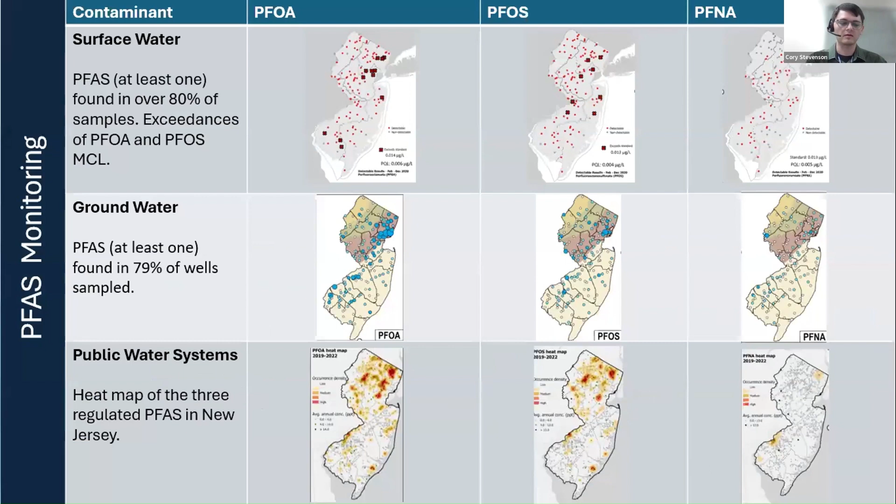In the last row is the heat map of PFAS prevalence in New Jersey water systems. As you can see, most of the contamination is in the northern part of the state and along the Delaware River.

For treatment approvals, there are two processes in New Jersey that water systems can utilize. There's a normal permanent process, which is intended for water systems to submit and install permanent treatment. And we also have the temporary treatment approval process.

The temporary treatment approval process is intended for water systems to use for pilot studies and interim treatment. PFAS treatment upgrades require a lot of space, which could impact the system's ability to install PFAS treatment within the state's 1-year compliance timeframe, as there might be issues with land use, backwash, waste discharge, or supply chain delays. Some water systems have proposed trailer units or other similar treatment to remove immediate exposure for their customers, while a more permanent option is designed and installed.

For the water systems that put interim treatment into place while a more permanent measure is designed, if the system already incurred an MCL violation, they must still continue to issue public notices.

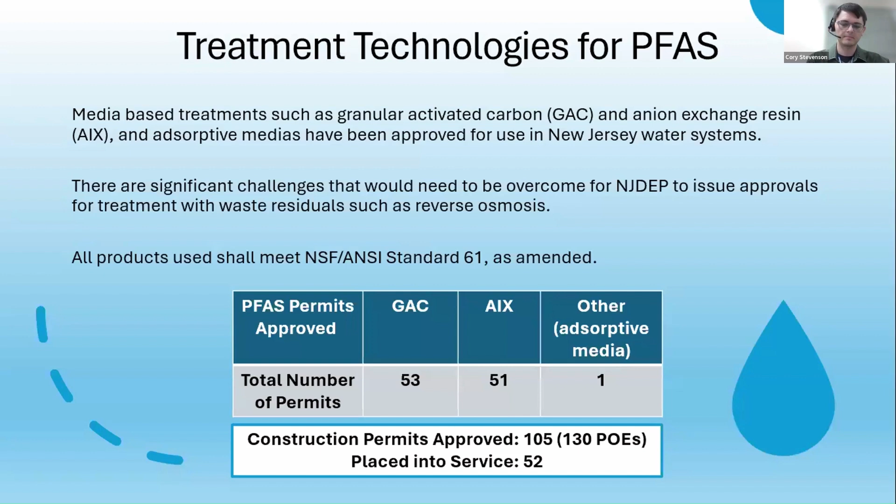Now, there are certain review criteria that our reviewers take a look at when considering a treatment technology and product. Just because anion exchange has been approved previously does not mean that all anion exchange medias work the same. And each individual product and trade name can work very different, and thus it needs to be reviewed.

The first thing our reviewers consider when looking at media is, has it been approved in New Jersey before? If it has been approved before and it has been effective, then it's usually a straightforward approval with information only being requested as needed. The standard condition for approval includes point of entry monitoring that is independent of compliance monitoring.

If a product being proposed has not been approved before in New Jersey, but it uses the same technology as one that has been approved, then we will likely need some more information. Typically, the reviewer will ask for case studies, such as approval in another state or use in a prior pilot study. In most scenarios, there is enough evidence there to justify an approval.

In the unlikely scenario there is not, then a pilot study may be required. The standard monitoring conditions are usually extended in these type of approvals.

For a new treatment technology that has not been approved before or has little track record, the treatment shall be pilot tested. These treatment technologies are when a state's temporary treatment approval program should be used. The conditions would typically require extensive monitoring and likely require the submittal of a sample plan.

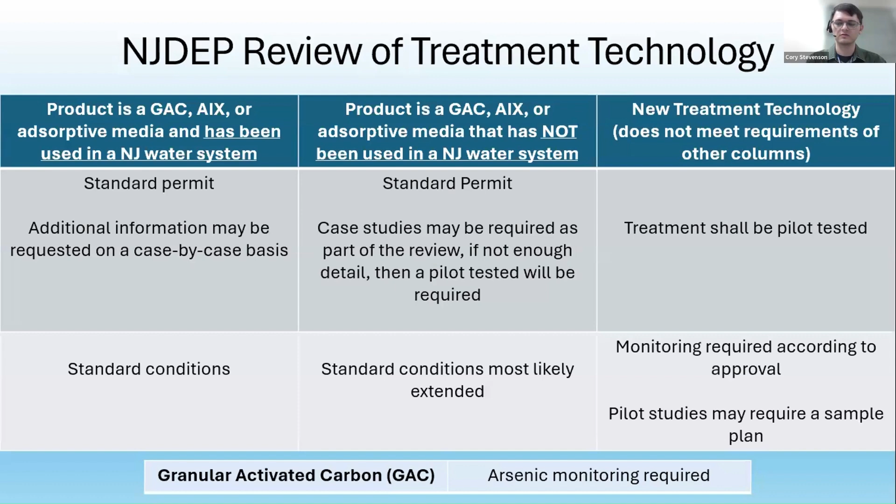If you go below the minimum, you may see short-circuiting in your media, otherwise known as preferential pathing. If you go too high above the maximum, it can lead to issues with pressure. The media layer thickness is as required by the state's regulations.

For the novel adsorptive medias, the design can vary, and it is recommended to use manufacturer recommended design criteria, but also to pilot study to confirm these parameters. As previously mentioned, all media must meet the applicable certifications for use. In addition, there's a chance of bacterial growth in these media beds, which may lead to disinfection being required.

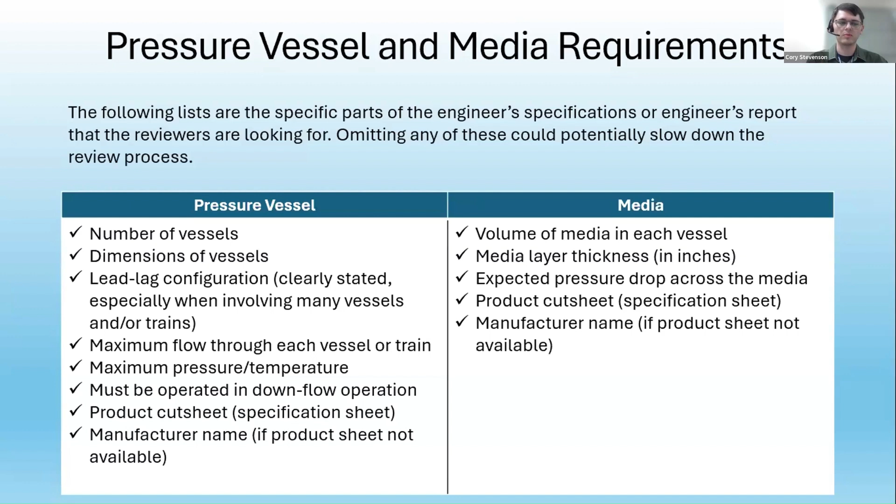Those are the big requirements for the vessels and media, but there are also requirements for the small features that can sometimes be omitted. At a minimum, a sample port shall be provided between each vessel to monitor for breakthrough. While this is the minimum requirement, for the large 20-foot high vessels, it is highly recommended that there are sample ports at various media depths to track breakthrough.

Pressure differential monitoring is also highly preferred for the vessels. When pressure losses start to increase, it indicates that the media is either being fouled, or at least in the case of GAC, can indicate when an operational backwash may be needed.

Anion exchange cannot be backwashed, so an increased pressure loss across the media can indicate that pretreatment is insufficient. If pressure differential monitoring is not provided, then at a minimum, pressure gauges shall be provided. Pretreatment such as cartridges and bag filters are common when using anion exchange.

Just because it's a minor feature does not mean its details should be omitted. All specifications shall be provided so that we can document the filter sizes and filter type. It's also highly recommended that there be some form of pressure monitoring for these filters as well.

The application should fully answer some other questions, such as how much wastewater is generated and how is it handled. This includes initial rinse and operational backwash water. If it is over a certain volume, then special permitting will also apply.

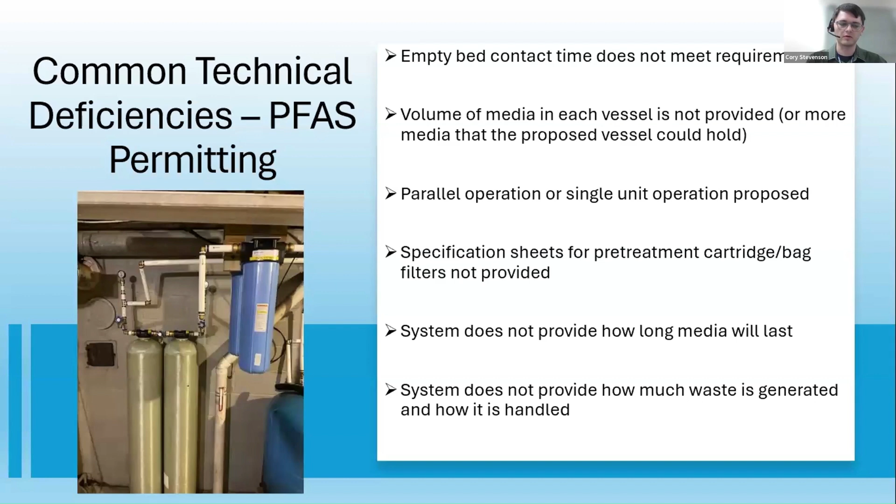Now, those are the deficiencies specific to PFAS treatment permits. Here are a few additional deficiencies I wanted to point out.

PFAS treatment is very large, and fitting the vessels and equipment inside can require full new treatment buildings. Some water systems have been using the vessels outside, and if you're doing that, it requires extensive heat tracing. And we've seen that even with heat tracing, fixtures can still freeze and leak.

In a lot of designs that we've been seeing now, water systems are using a heated valve house between the vessels, and that has had more success. So if any equipment is outside, the heat tracing efforts and all efforts to protect from freezing need to be documented. The treatment order on drawings can also sometimes just be outright confusing.

In many situations, if the system submits a flow diagram in support of the drawings, it would help eliminate a lot of the back and forth between the authority and water systems.

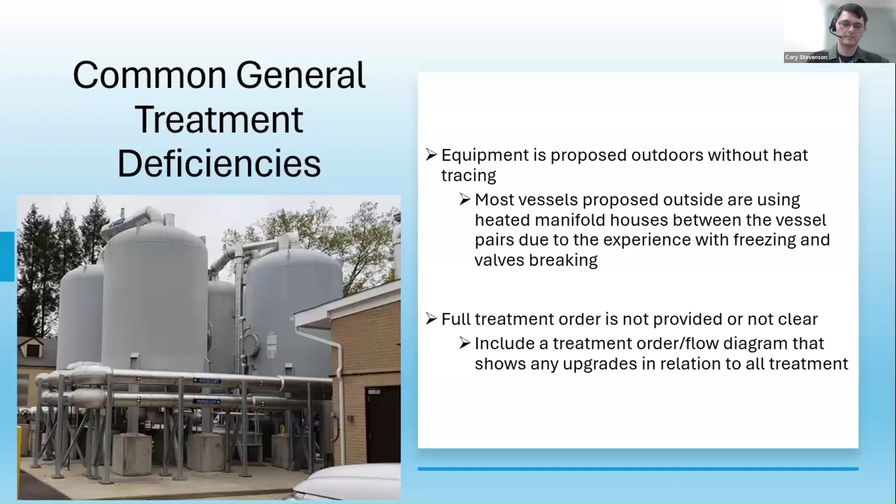Looking at pilot studies now, there are two routes that a system can go for pilot and treatment, and it depends on what they do with the treated water. If the treated water is put back into the water system for potable use, then the pilot study must go through the state's temporary treatment approval process.

This way we can certify that all chemicals or products that are used are safe and are not introducing risk to consumers. If the pilot studies are discharging water to a sewer or being collected for off-site disposal, then no permit is required.

In these scenarios, though, we highly suggest that water systems meet with the permitting team so that we can provide feedback on any parts of the study.

In New Jersey, groundwater systems are not required to pilot study treatment unless it is a new media or technology. As the state is small, water quality does not differ significantly, but there's also been a lot of success in treating groundwater in all areas of the state.

However, if there's a lot of iron, manganese, or competing contaminants in the water, then it might be in the system's best interest to pilot study the best treatment.

We also highly recommend that surface water systems submit pilot studies, as there is very limited data out there for PFAS treatment on surface water, and water quality is variable, and it's also going to be expensive.

While every pilot study proposed goes through an individual review, and the reviewers may request specific information, we do have some general guidelines for what we want to know.

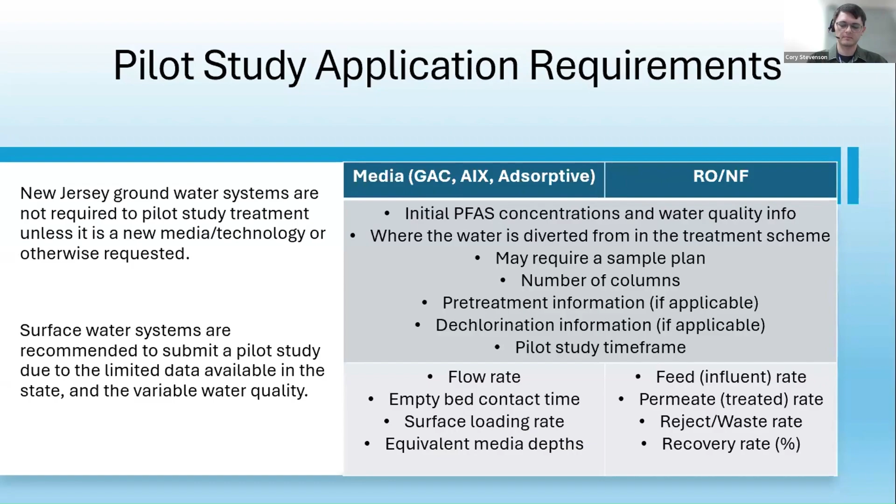When a pilot study is complete, the expectation is that the water system shall submit a full written summary of the results with the analytical data and figures to support the findings. At a minimum, the results should show treatment removal efficiencies and the expected media or membrane life with the figures to support it.

We've also had some water systems have to change out filter micron sizes to prevent media fouling during testing. So any such water quality issues during testing should also be documented. It's also highly recommended that the water systems meet with the reviewing team to discuss the results.

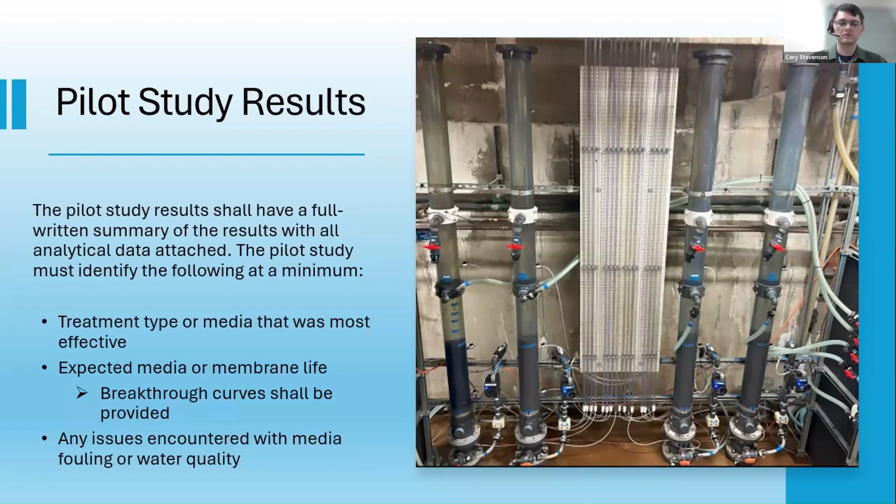Here's an example of how New Jersey handled a pilot study proposal. A water system reached out to discuss the idea of using a novel treatment technology that uses electrostatic treatment in conjunction with reverse osmosis.

They do not have a nearby sewer, and handling waste in general would be problematic as they're a very small water system. A full-scale pilot study was proposed where the reverse osmosis concentrates the PFAS and the electrostatic treatment removes the PFAS from the water.

A bench-scale study was provided to the department in addition to other case studies of its use. The department then set up a meeting with the water system, their engineers, and a manufacturer to discuss the treatment and also the design requirements that we would look for as part of the review.

The application was submitted, reviewed, approved with a monitoring condition similar to that which is shown on the right here.

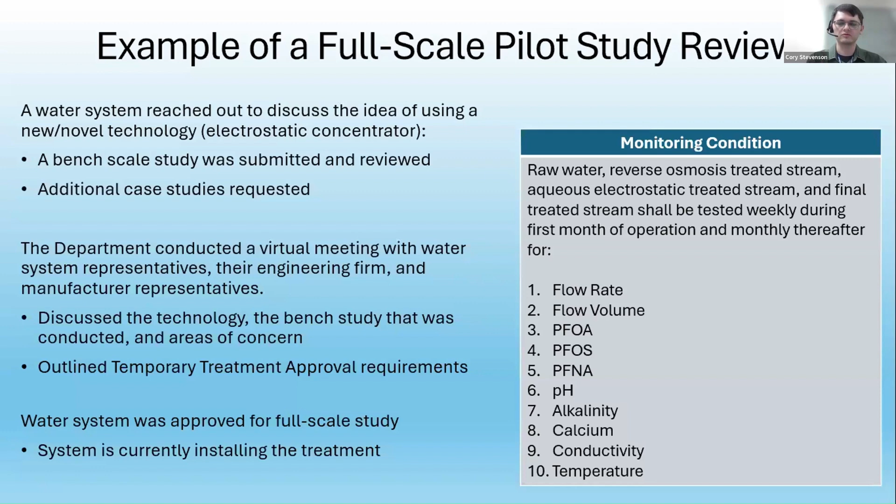Most of what we discussed today is more so related to groundwater design, as surface water design can be quite problematic. Groundwater applications require lead lag design and almost always use pressure vessels. This likely would not be feasible for surface water systems, especially our larger surface water systems that treat up to 200 million gallons per day at a single treatment plant. This may mean that an alternate approach to design might be needed.

To adequately address and understand all challenges, the PFAS rulemaking team recently held a focus group with all New Jersey surface water systems and their engineers. The NJDEP is currently considering all feedback as we move through PFAS rulemaking.

As New Jersey has prior rulemaking experience with PFAS, we've also had time to reflect on some areas that could have been improved upon. PFAS is not a drinking water initiative alone, as the installation of PFAS treatment can impact land use by requiring wetlands permits, can impact wastewater group by requiring a discharge permit for backwash water, and many other permits. A committee was formed to evaluate the full impact across the entire NJDEP.

The goal of the group is to identify all permitting processes and outreach areas that can be improved. The committee includes upper management and staff from multiple divisions at the NJDEP and representatives from both water systems and engineering firms.

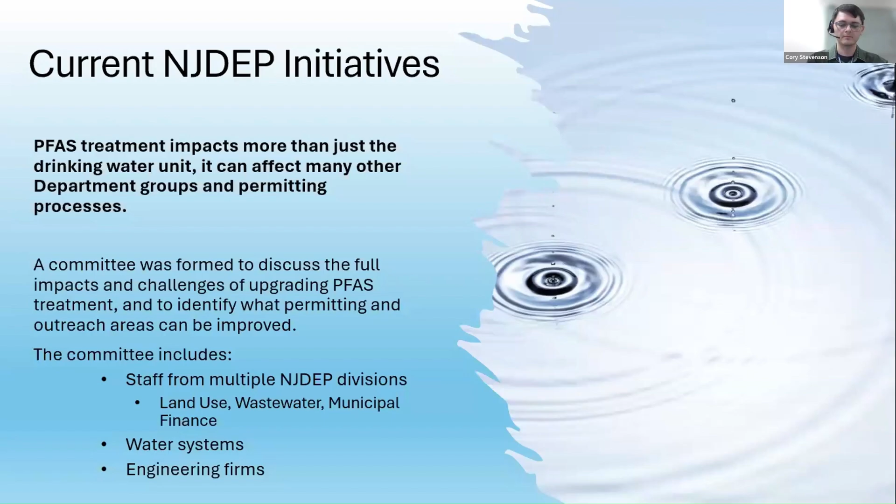So that was a quick glimpse of how New Jersey handles treatment reviews, some things that our reviewers look out for, and the state's current initiatives.

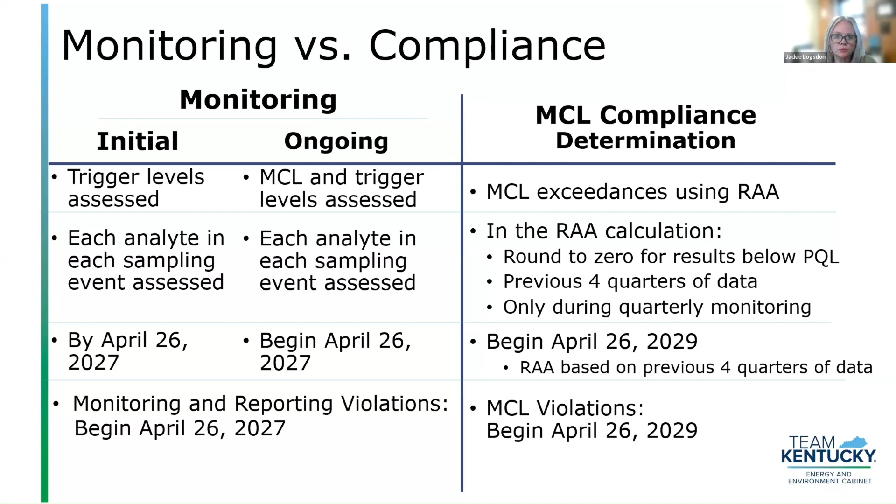The purpose of this slide here is just to show you that for the remainder of this presentation, I'll be focusing on initial monitoring. That's our effort right now in Kentucky, which I'm sure it is with a lot of the other states too. We've kind of got this broken down into 3 different compliance milestones, so I'm just going to focus on that initial monitoring.

With the initial monitoring requirements, different data that can be used to meet them includes the UCMR 5 data. In Kentucky, we have 130 community water systems participating that will have that UCMR 5 data. We also have Division of Water monitoring data available for all of the water systems in Kentucky, with the exception of a few private, non-transient, non-community water systems.

And then we also have water systems that have been doing their own sampling. For any system that wants to use their own samples, we're verifying that they meet those monitoring requirements.

So what we're taking a look at in Kentucky, and something that we're encouraging operators and water systems to take a look at, is what does initial monitoring look like for your system? And how does the UCMR 5 data fit in? And also in Kentucky, how does our monitoring data fit in?

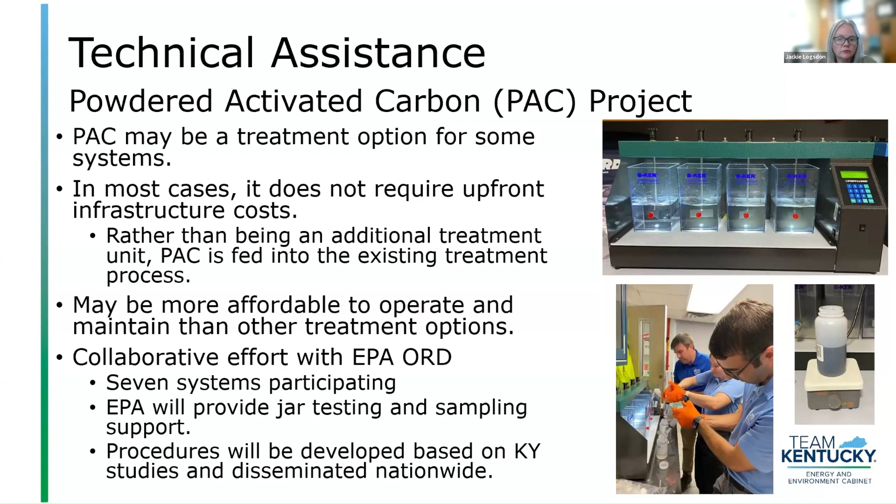We have already conducted our first site visits, and bulk water and samples have been collected at these systems.

We also have a stakeholder group - it's a PFAS subcommittee of our water utility committee. We have 3 subgroups: a funding, a bench and pilot study, and a communications subgroup. This is a really good opportunity for us to be talking to the water systems to find out what they need from us and how we can help water systems comply with the rule and provide support and resources.

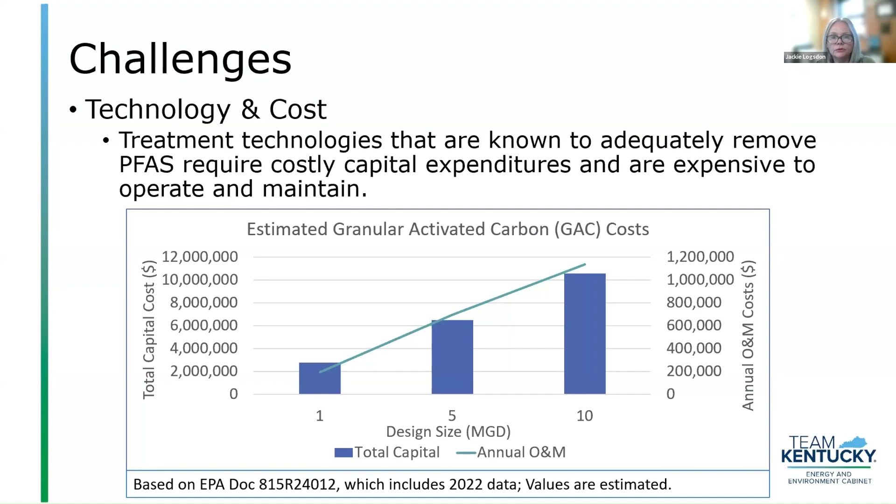When you're looking at the estimated cost for GAC for a 1 MGD plant installation, it's just above that $2 million mark, with O&M around $200,000 a year. With a 5 MGD plant, you're looking at above $6 million for infrastructure, and then around $700,000 a year for O&M. And for a 10 MGD plant, you're looking at just over $10 million in infrastructure and greater than $1 million per year on O&M.

Other challenges we're looking at: water systems have 5 years to select a treatment method and engineer a project, obtain funding, obtain approvals, acquire equipment that may have long lead times, install or construct the project, and also collect 4 quarters of compliance data to be used for compliance determination in 2029. So actually, the first few bullets need to be completed by 2028 in order to be collecting PFAS data that's in compliance for that running annual average in 2029.

There are going to be some disposal issues, looking at land farming impacts, liability, landfill disposal challenges, and personnel. If water systems are installing new treatment technology, there's going to be training needs in Kentucky, and I'm sure nationwide. We're looking at an operator shortage.

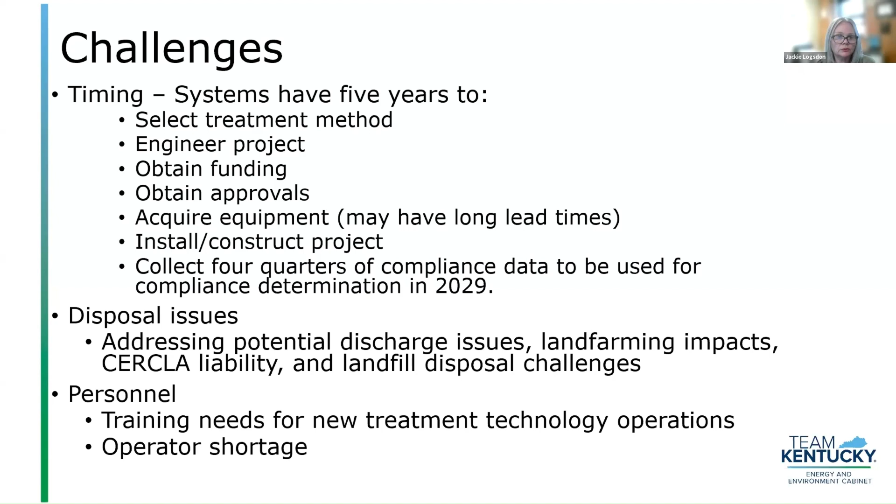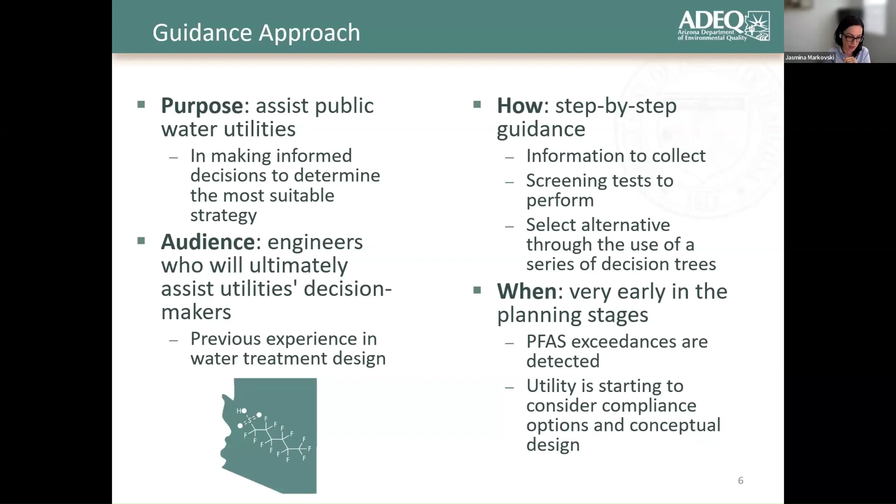So to do something like this, you need a team. Now that this document is published, I can confirm, yes, it takes a village. But that's actually the key point and value of this type of document. It is not made in a vacuum, meaning stakeholders were involved from the very, very beginning.

We had multiple people from state government, ADEQ specifically. Then we had help from federal government, specifically EPA or their office. Then we had non-profit organizations, leading media manufacturers—you can imagine these are very competitive people, so how do you cover it all without creating conflict. And eventually we had consulting firms, because those are the stakeholders that are eventually going to submit those applications to us. So it's very important to be transparent and be on the same page, with agreement between everybody.

So let's talk about what information you need to run this tool. To do any kind of design, you need information and data, and there's nothing new about that. But if you want to summarize it, I would say you need to collect knowns and screen unknowns.

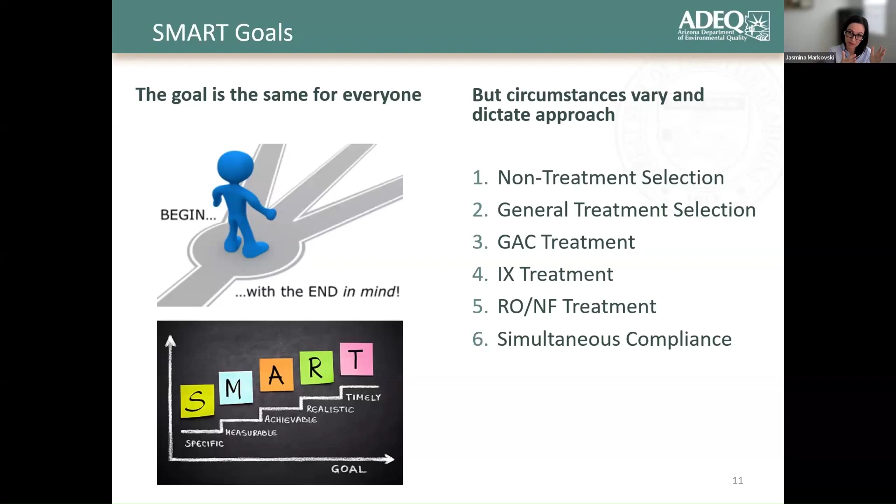So the goal is the same for everyone, but circumstances vary and dictate the approach. When it comes to approach, you have non-treatment options and treatment options. But you also have simultaneous compliance, because whatever you do, you want to be sure it's not at the cost of something else. You want to be in compliance with PFAS, but also with everything else.

So in a nutshell, non-treatment starts with asking about other existing sources, checking if you have the option to switch or blend. If this doesn't work, then you can think about developing a new source or rehabilitating the existing one.

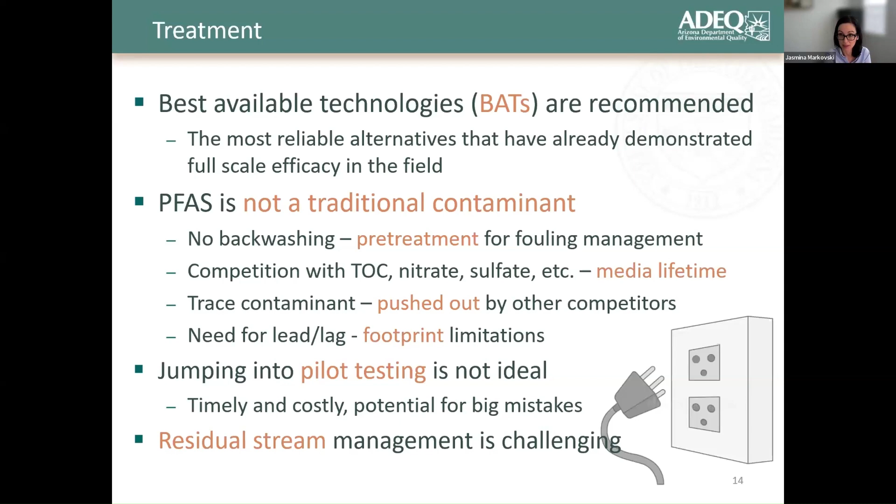So with that in mind, we go on to general treatment selection. The purpose of this is to indicate potentially most suitable treatment alternatives based on more general questions. Here is what it means.

You are first asked about oxidation at the source. We have many wells with chlorination at the wellhead. This is because not all treatment technologies are compatible with that oxidant. Based on your answer, potential issues will be identified and options to solve them will be specified. The point of the questions is not to stop you, but basically provide solutions - to tell you, here might be the potential issue, but here is how you solve that.

Then you will be asked about fouling, and fouling is very important. That's the pre-treatment that you probably have to include. When you think about fouling, you have to have a broad view. It's about particulates, organic fouling, inorganic and bacterial fouling. You have to cover all of that.

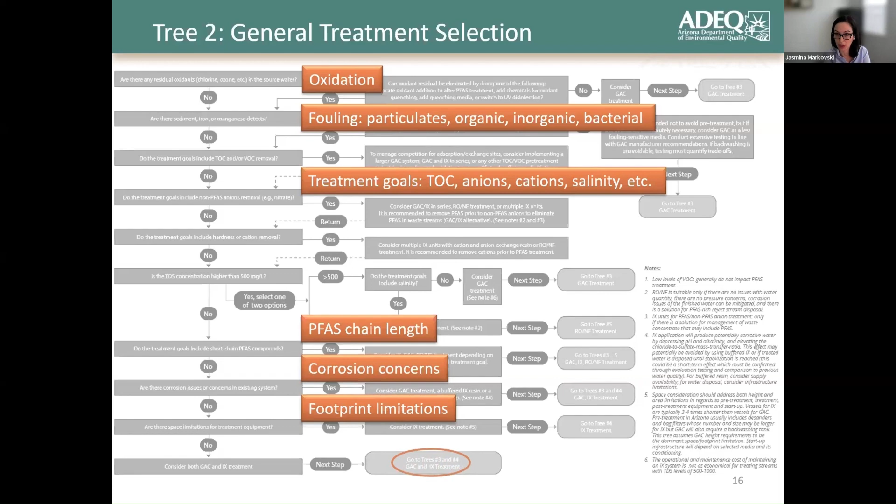Then treatment goals. We know you want to address PFAS, but do you have something beyond that? It's very important to know at this level. You will be asked about PFAS chain length, corrosion concerns, footprint limitations. So eventually you will end up with one or more technologies, and then you will be prompted to more specifics about each one of them.

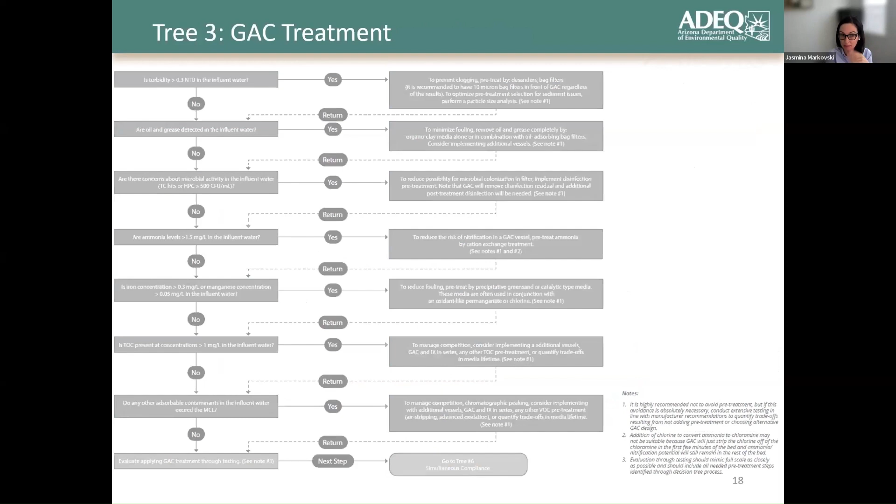So if that's GAC, here is the decision tree. Again, you start with the fouling question. In this case it's more specific for GAC, so it's not repeating what we had in general treatment selection. Then you have a question about nitrification, and that's because if you have ammonia, then you have to deal with that. And the only way to deal with that is really to have pre-treatment.

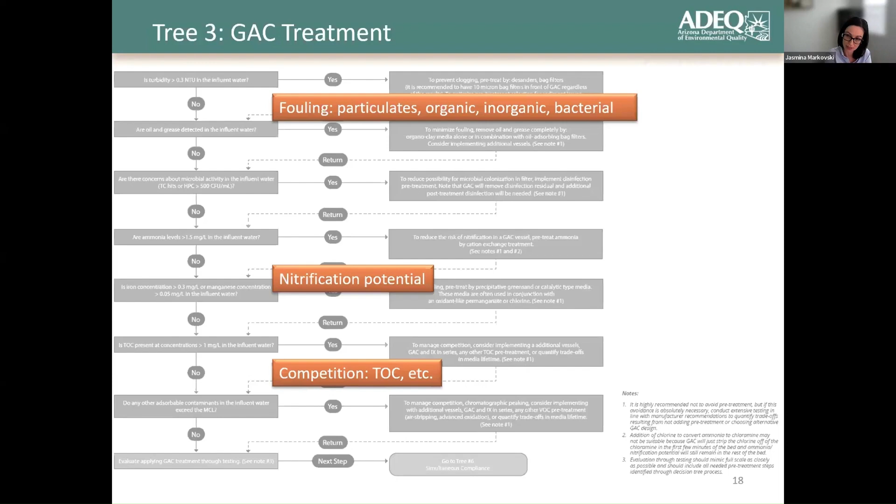This one is very interesting. There is always competition. You cannot avoid that, but it's very important to know how much and how much it's going to cost you. So here we are asking about TOC because TOC is a major competitor for GAC. And we are asking if you have more than one. People usually say, why one, why not something else? Well, this doesn't tell you to stop here. If you have TOC of 1 ppm, you cannot use GAC - the point is very different. It's telling you that competition starts there and that you have to pay attention.

Now you need additional vessels. It's going to come at a cost. So either you are going to do the pre-treatment or your media lifetime is going to be shorter. It's really your decision, but you have to consider that. You should not be surprised eventually. So you have to calculate that.

So finally, this tree is leading to treatment evaluation. And that's because this is just preliminary screening and you need to get more specific through testing. And then the next thing is simultaneous compliance, because you can put GAC, you can address PFAS, but how that affects everything downstream is a question to consider.

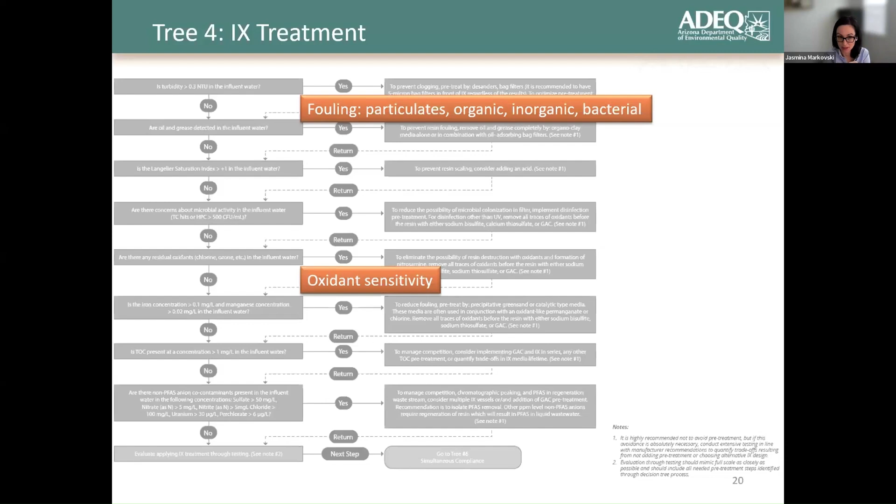So the next tree is ion exchange, and it's pretty much following a similar pattern. There is a question about fouling, there is a question about oxidant sensitivity, because if you have oxidation before ion exchange, you're going to produce nitrosamine and you are going to degrade your resin. And that's something definitely that you want to avoid. This is specific for any kind of polymer-based media.

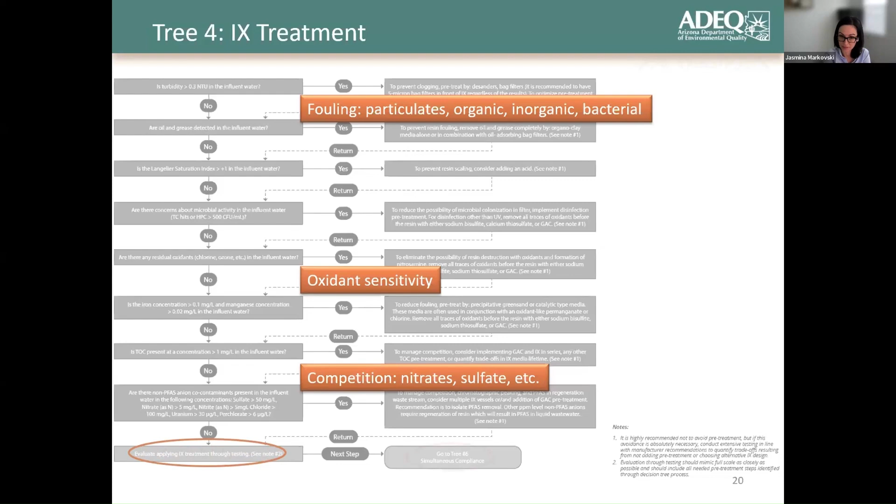Then competition - it exists here as well, it's just a different type of competition. Here you're more focusing on anions, so you're talking about nitrates and sulfates mostly. Again, it's leading you to evaluate this treatment technique before you think about installation. And simultaneous compliance.

And here is our third BAT, or high pressure membrane tree. While this approach should definitely not be the primary option for Arizona, there are situations where this is actually the only and best way to approach it. Examples are usually complex water matrices with extreme salinity and multiple treatment goals. And we do have these - water in Arizona has high salinity.

So what is specific for membranes? Again, you are checking about fouling, but because with membranes you have those high recovery processes, you are recycling streams. So it's very important to address all of these in your raw water, but also in the stream that you are going to recycle.

And then when it comes to that pre-treatment, in this case it's not kind of a choice. It's not part of optimization. It's more like a necessity, because if you don't have pre-treatment with the membranes, you can get very extreme equipment failures.

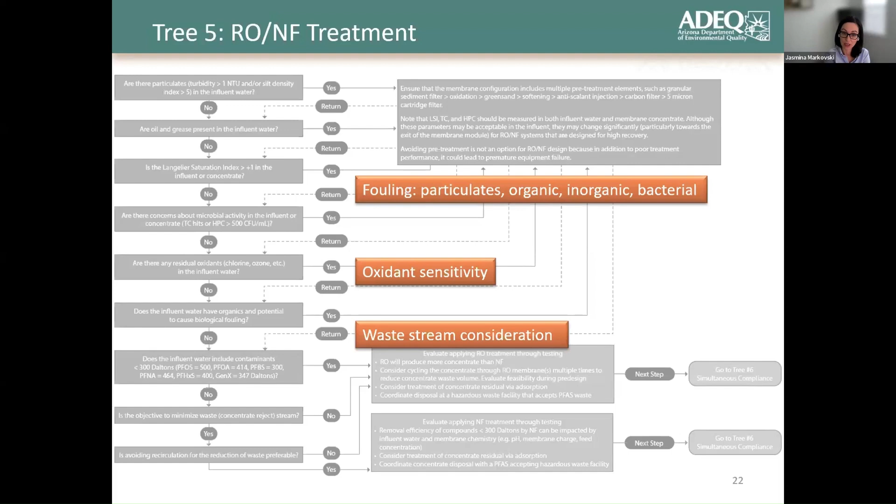What we know is that nanofiltration is making less waste, and it's effective for PFAS. But it is interesting that I am not aware of any system using nanofiltration to address PFAS. So please, if you know some, let me know. I would like to learn more and understand why we don't see more of these.

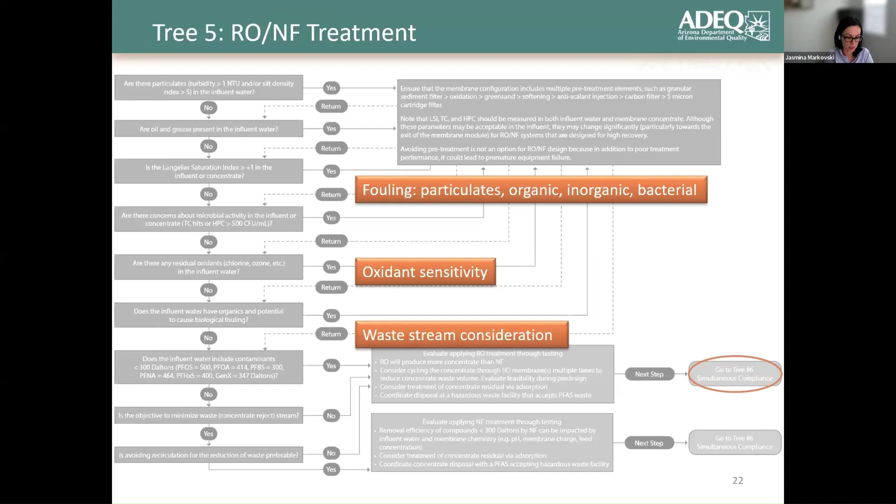And in this case, we are focusing here on corrosion control and bacterial control. I think previous speakers also spoke about this, but the point is that you are here either changing source or treatment. And whenever any of these happen, you have to go and do a corrosion control evaluation and basically address your OCCT, optimal corrosion control treatment. You have to reassess that.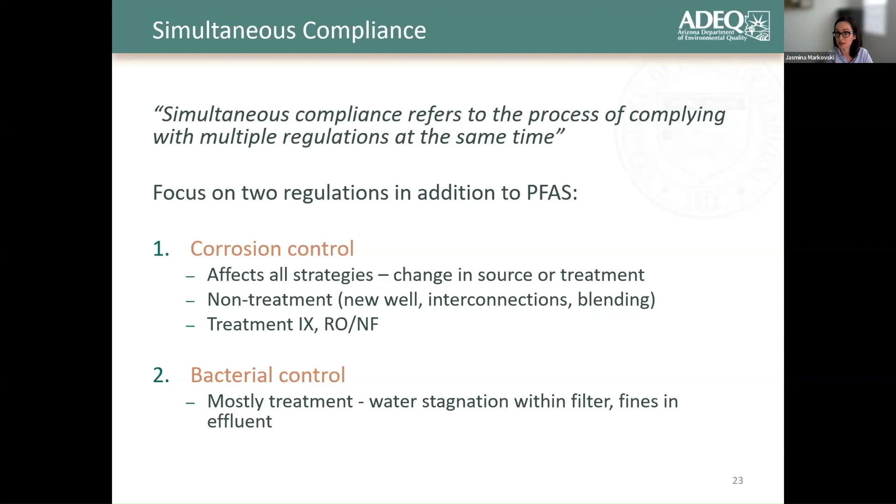And then we have bacterial control, because all of a sudden you have a filter. That water is going to be stagnant there, maybe for days, maybe for hours. It really depends on temperature, it depends on many things what the impact is going to be. So we have water stagnation, and then we have potential fines in your effluent. All of this is going to support bacteria growth. So we highly recommend chlorination to come after any kind of treatment.

So let's see, I will go quickly through some key takeaways. What can I say? Selection is utility specific. There are many factors to consider, and it's more than media lifetime. Non-treatment is just a starting point, and it should be a priority for small systems. Treatment is not easy, but you can achieve that.

It is important to think about pre-treatment. That's going to basically support your treatment, whatever you decide. Technology evaluation is critical, and it comes after decision trees.

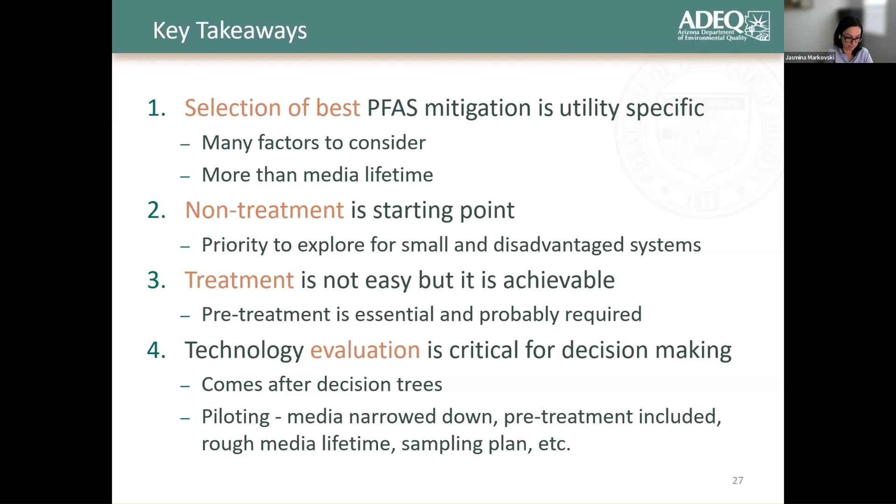Collaboration is very important. What does it mean? It means that we want clear expectations from the utility. They have to say what they want. They have to involve the engineer from the very beginning. There are vendors, many of them providing support, and that's something that is great, we should use that. And then eventually, when it comes to the regulator, we have to come with transparent expectations, because it's much easier to communicate that way.

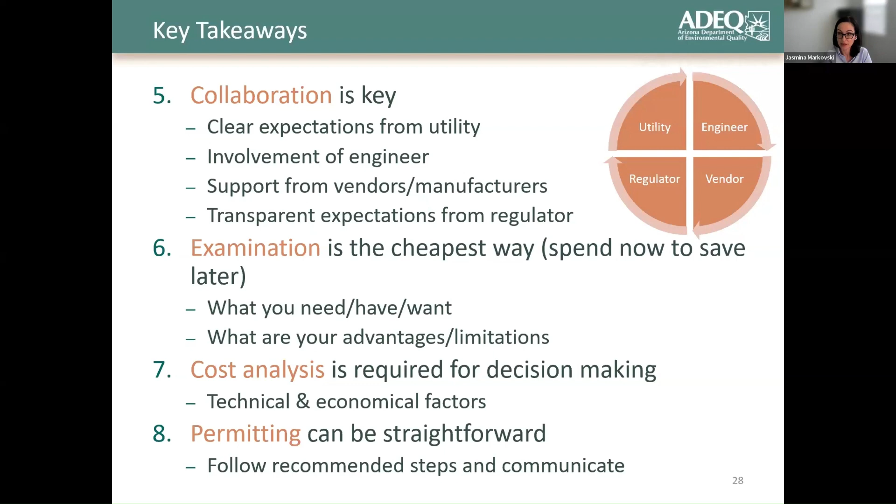Then number 6 says examination is the cheapest way. It really means spend now and save later. Spend on this screening, it will help you to get your decision. Don't forget about cost analysis. All of this is technical, but eventually it's a techno-economic decision. And then permitting, it can be straightforward. So if you follow recommendations and communicate in an open way, it can be an easy process for both sides.

And if you also involve modeling, you can get things done much faster. So we are focusing on accelerated testing that may require approaching from many sides, but eventually getting your results in a shorter and cheaper way.

Then point of use, point of entry considerations - this is a tricky part. We try to help our customers understand when is yes, when is no, and how to do it. Cost tools - we can't do any of this without knowing how to calculate cost. And eventually waste management options, which others mentioned is really the elephant in the room. We have to specifically define what is required from ADEQ, and keep adjusting that in line with upcoming regulations.

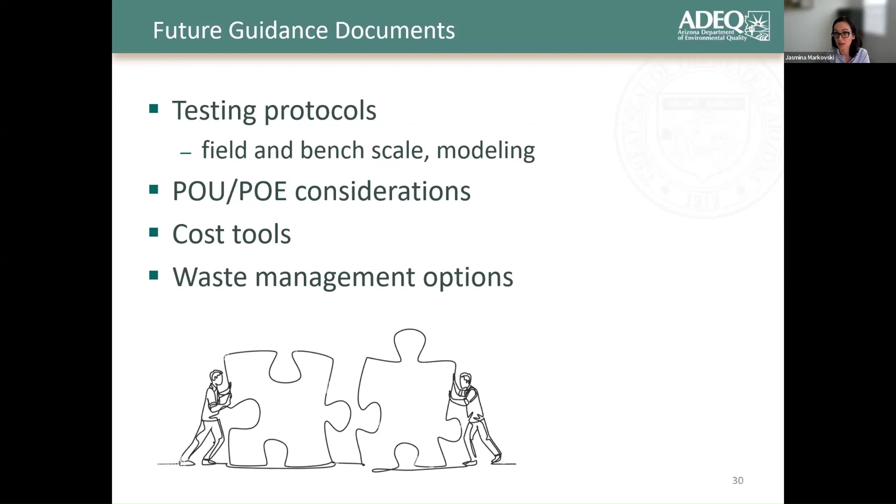Feel free to contact me anytime, but beyond me, there is an entire ADEQ team working on PFAS. If you have other than technical questions, please contact my colleague Sarah, our amazing PFAS project manager, who absolutely helped get the Decision Tree project realized. Thank you.

Thanks, Jasmina. We will do a couple of questions before we move into our break. With TOC competition for PFAS treatment with GAC, is the issue that high TOC levels will cause the media to be exhausted faster and require a higher media changeout frequency?

Yeah, that's correct. That's how any kind of competition works - it's fighting for the same site, so your media life is going to be shorter. It doesn't mean it's not going to work for you, but it's important to know how short that is. How often will you have to change your media? How much will that cost? And is your TOC at the same level all the time, or is it going up and down? What are those variations - is there a seasonal impact? That's why sampling is important. We know TOC has impact, but it's about concentration, and about the ratio of TOC to PFAS and all the other background interferences.

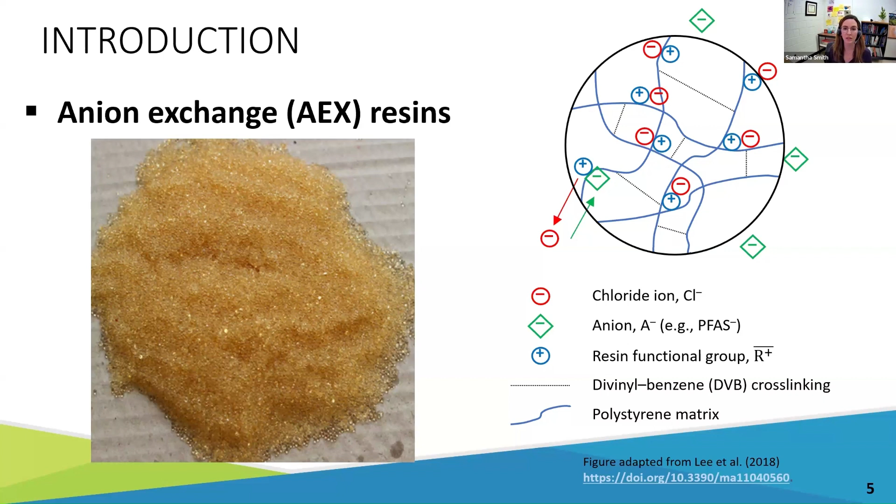While anion exchange is promising for PFAS removal, we need more information for treatment optimization. There are several approaches to investigating anion exchange treatment. Pilot studies are frequently used for estimating the efficacy of full-scale treatment, but they're costly and time-consuming. The results are limited to the study design and influent conditions, and it's really not practical to run a pilot for every specific treatment scenario.

Laboratory studies are also common, but for PFAS, there are limited data and widespread errors pertaining to isotherms and kinetic models. Also, useful information is often omitted, such as the effects of major competing inorganic anions, which also occur in drinking water.

Lastly, treatment models are useful tools that can help us design effective pilots, understand our results, predict filter changeout, and also understand cost drivers in treatment systems. And if you'll be tuning in for the next talk, you'll also learn a lot about EPA's PFAS modeling efforts from Jonathan Burkhardt.

Specifically related to this research, an ion exchange column model was recently developed by US EPA, and that's publicly available at the GitHub link at the bottom of the slide. Just to quickly summarize, this model is capable of handling monovalent and divalent ions in drinking water, including PFAS. It uses the homogeneous surface diffusion model, or HSDM, for gel resins, and the pore and surface diffusion model, or PSDM, for macroporous resins. And column performance is typically assessed from breakthrough curves.

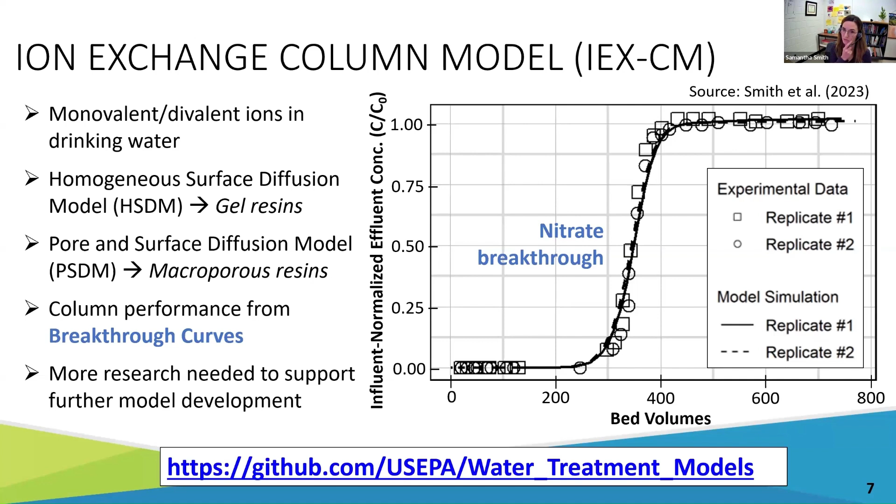However, to support further model development, we need more data. There are several research gaps that must be addressed to better understand PFAS treatment via anion exchange overall, and also to support that ion exchange column model development. First, the empirical models that are commonly used don't provide much insight, and the fundamental parameters needed by mechanistic models are scarcely reported, including the equilibrium and kinetics parameters.

Also, few studies are conducted at conditions relevant to drinking water. Many instead focus on highly contaminated sites or other environmental matrices. And PFAS studies also often don't address major inorganic anions that are present in drinking water, such as nitrate, sulfate, and bicarbonate.

These are important to include because they're usually at concentrations orders of magnitude greater than PFAS, so milligrams per liter versus nanograms per liter perhaps. And these can compete for exchange sites, leading to increased resin usage. Secondary to this, the relative changes among concentrations of the inorganics themselves during anion exchange treatment could create concerns regarding corrosion control. So it's not only essential to investigate them in relation to PFAS treatment, but also pertaining to anion exchange usage in general.

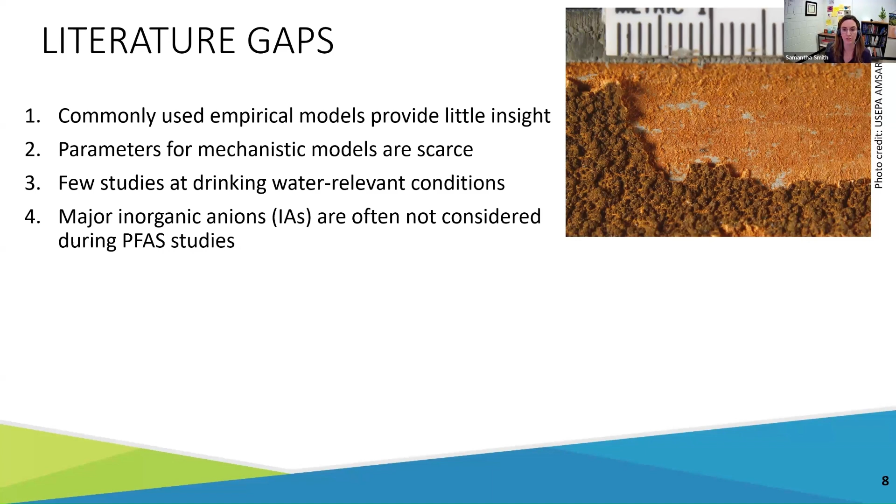Lastly, the impacts of natural organic matter, or NOM, on PFAS treatment by anion exchange are still poorly understood. Of particular relevance to this research, NOM can inhibit contaminant removal by anion exchange, either due to direct competition for those exchange sites or by physically fouling the resin surface, which would block access to those exchange sites.

Therefore, to address these gaps, we conducted pilot scale anion exchange column studies focused on obtaining values for the model input parameters, getting column breakthrough data sets for PFAS and inorganic anions at drinking water relevant conditions, and also assessing NOM effects.

Just briefly covering some overarching materials and methods for these column studies. The anion exchange resin used in all of the column experiments was the Purolite PFA 694E, which is a strong base polystyrene divinyl benzene resin. It is gel type, so it does not have macropores. It comes in the chloride form, and we rinse and condition that before use, and it is intended as a single use resin, and it is PFAS selective.

The NOM treatments used NOM that was sourced from concentrated lyophilized Ohio River water that was produced in a previous study. We reconstituted that into stock solutions, which were used to dose our column feed water. And this helped produce realistic, stable influent conditions in our lab-created source water.

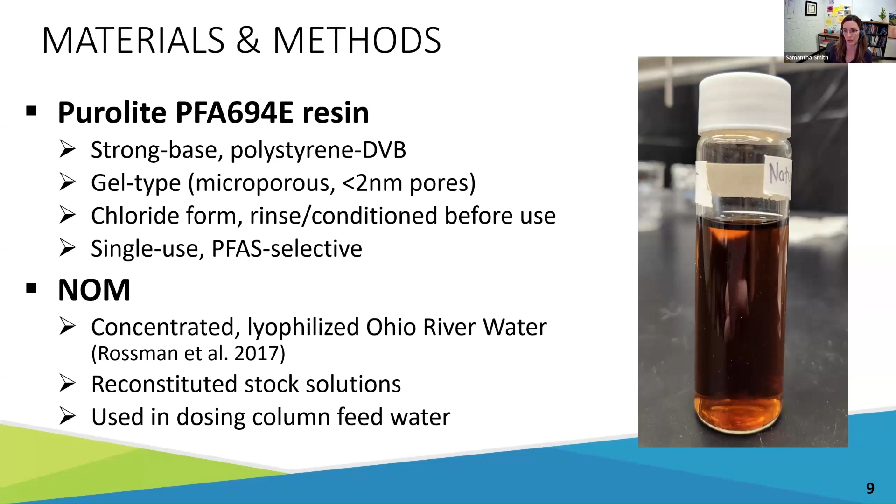For PFAS, the 9 compounds listed here were included. This was based on toxicity assessments by US EPA that were available back when we started this research around 2018. These also include the 6 that are in the PFAS rule. In summary, there are 5 carboxylic acids or PFCAs, 3 sulfonic acids or PFSAs, plus 1 ether acid whose name is GenX. And among these PFAS, the carbon chain lengths range from C4 to C10.

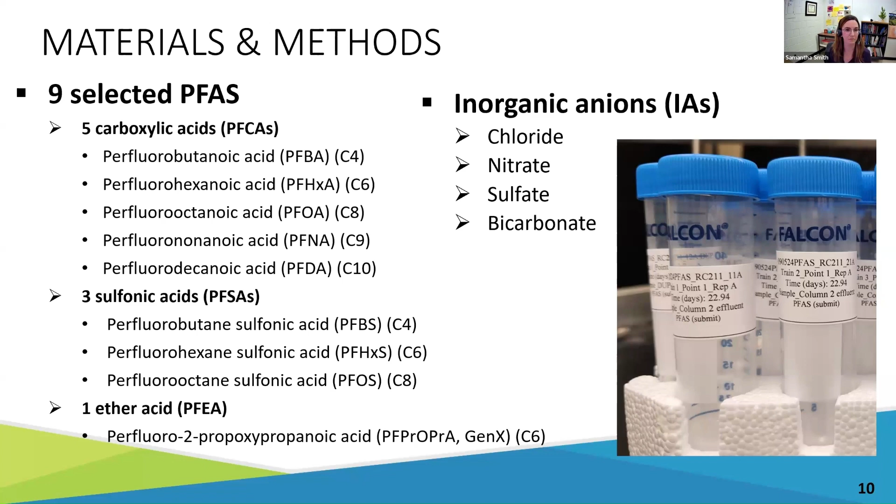The major inorganic anions, I'm abbreviating that IAs, these were chloride, nitrate, sulfate, and bicarbonate that we included in that feed water. Samples that we collected during the studies were measured for this list of analytes.

The PFAS analysis followed an established LC-MS-MS online SPE method. Inorganics were measured by ion chromatography. Bicarbonate concentrations were calculated from total inorganic carbon and pH. We also measured pH and temperature, and the NOM parameters included TOC, UV absorbance at 254, and those combined as SUVA, or specific UV absorbance.

The flow path is shown left to right. Each system is fed from a 200-gallon HDPE feed tank using an HPLC extraction pump, set at 40 mils per minute. A pre-column with silanized glass wool precedes the resin columns to protect from fouling. Then 2 1-inch diameter resin columns are plumbed in lead-lag configuration to allow for sampling of 2 empty bed contact times, or EBCTs, from each system.

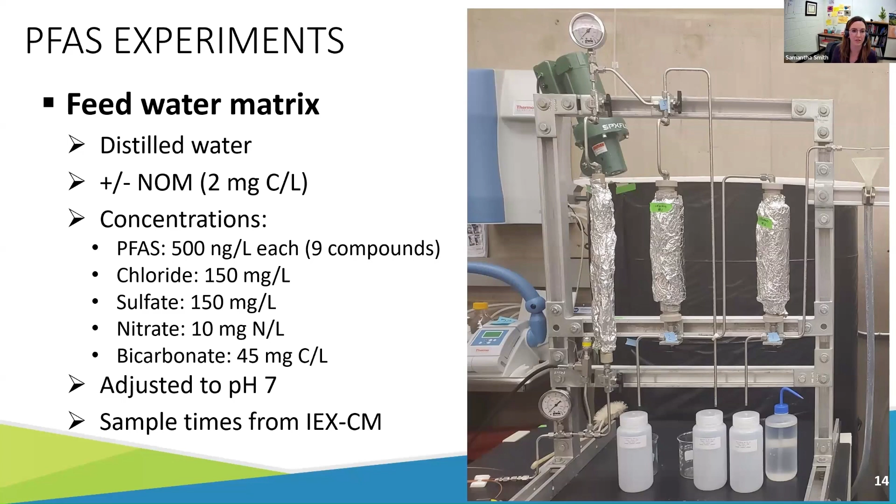As with the inorganics, the feed water was adjusted to pH 7, and we did our sampling design for collection times based on ion exchange column model simulations for the experimental conditions.

The PFAS experiments were conducted over 2 experiments, covering 4 different EBCTs. First, the top experiment used shorter beds, 0.5 and 1 minute EBCTs, to observe breakthrough for as many of the PFAS as possible, which is challenging due to their wide range of selectivities. The second experiment then used longer beds, the 1.5 and 2.5 minute EBCTs, to better capture the breakthrough of the 3 least selective PFAS, which elute the fastest.

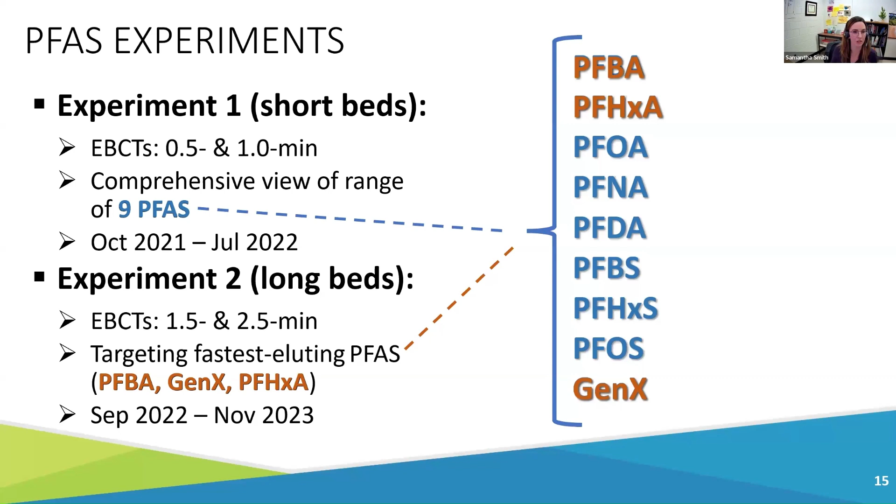Those were PFBA, Gen X, and PFHxA, and this would also allow us to get better resolution on any NOM effects that had occurred on those. All other conditions remained the same between the 2 experiments.

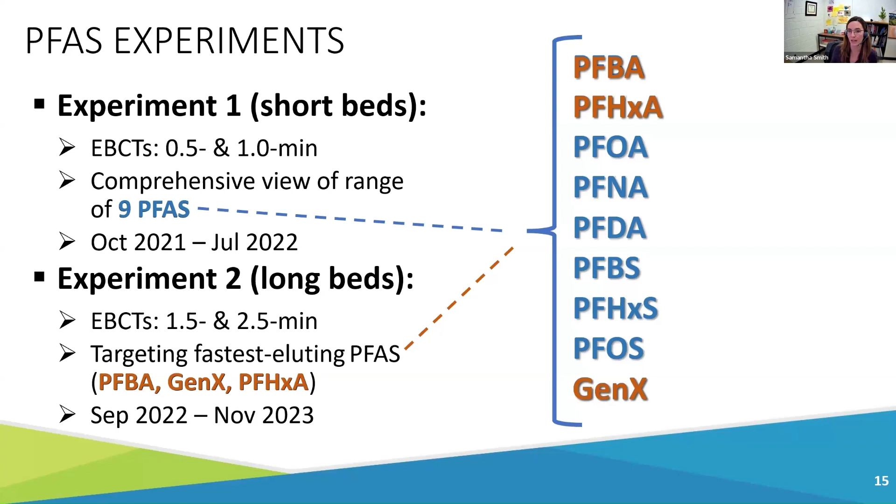And while the inorganics experiments ran for 7 days, you can see that the PFAS runtimes are much longer here: 9 months and 13 months for those 2 experiments.

So just briefly looking at the non-PFAS constituent breakthrough behavior, the inorganic anions breakthrough, which isn't pictured, concluded by about 500 bed volumes. That was very quick and similar to what was observed in the inorganics experiments.

So just to show some overall trends, here are the breakthrough curves for all 9 of the PFAS, with panels for each PFAS as columns, and these are for the 0.5 and 1 minute EBCTs. I'm focusing on those just because they have more PFAS breakthrough data.

The breakthrough trends largely related to PFAS selectivities from the literature, and they varied by chain length and functional group. For the carboxylic acids, which I'm outlining in orange, you can see increasing removal or less breakthrough as you move from left to right with increasing chain length. So PFBA on the left is a C4, PFDA on the right is a C10.

Similarly, for the sulfonic acids in green, we see increasing removal going from PFBS, which is a C4, to PFOS, which is a C8. And comparing these two groups, we see the sulfonic acids have much better removal than the carboxylic acids of the same chain length, which is expected due to their much higher selectivities.

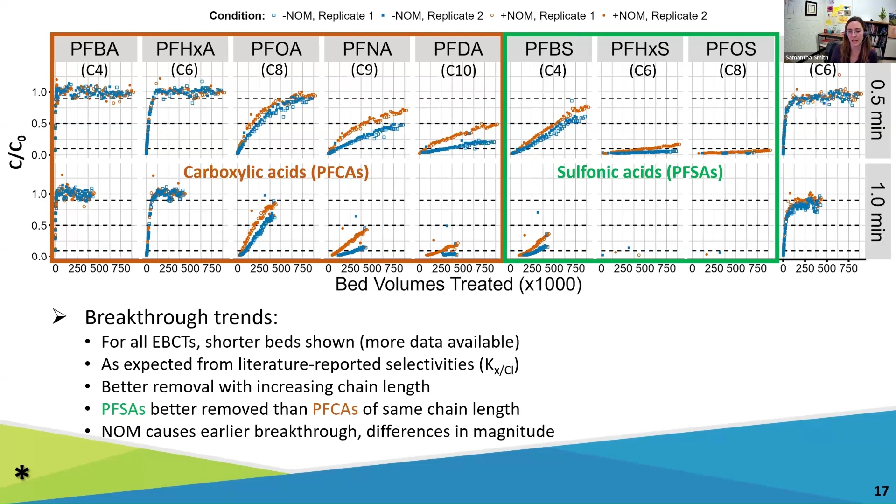I'll come back to GenX breakthrough behavior later because there are some interesting things happening there. Lastly, looking at NOM effects overall, you can see that the treatments with NOM, which are in orange, tend to break through earlier than those without NOM in blue, meaning that the NOM is causing some reduced treatment performance. There are some obvious differences in the magnitude of this effect among the PFAS.

So looking at the effects of NOM on PFAS breakthrough, we observed that NOM effects varied by PFAS and by EBCT, and this was apparently due to physical fouling of the resin. It was useful to make comparisons based on early breakthrough simply due to having more data among the PFAS. Early breakthrough, I specifically mean BV10, which is bed volumes to 10% breakthrough.

This figure shows the percent change in BV10 for treatments with NOM versus without NOM, where there was sufficient breakthrough data to do so. The trends among PFAS largely corresponded to selectivity, and minimal NOM effects were observed for the less selective PFAS.

For example, PFBA only saw a 2.8% reduction in BV10 versus a 74% reduction for PFDA. An exception to this was PFBS, and based on its selectivity, it was expected to trend somewhere between PFOA and PFNA. However, it had later breakthrough, so greater removal, and also lower NOM effects than expected.

Both of these could be explained by PFBS's smaller size. Its molecular weight is lower than the other very selective PFAS, so it could be expected to have much faster mass transfer kinetics, as well as be able to get in and access sites that the larger PFAS couldn't reach. This would result in its lower NOM effects compared to similarly selective PFAS.

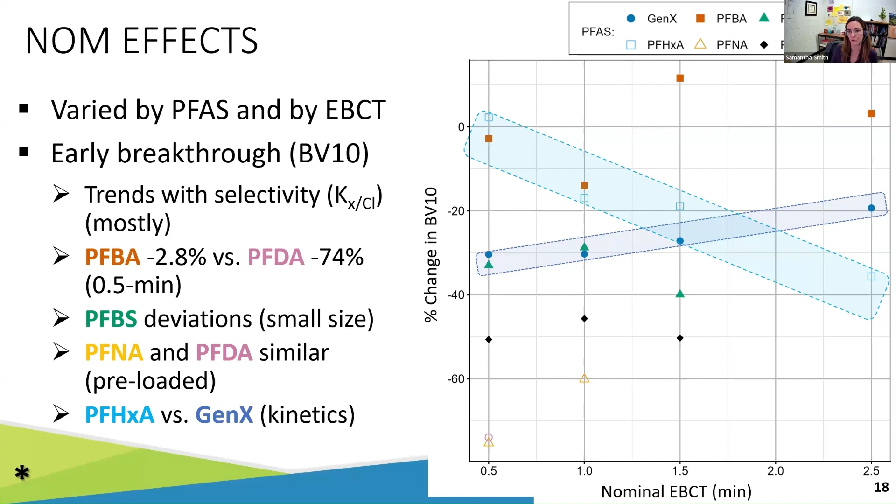So there are several reasons that this was judged to be a legitimate effect. First, these trends we've observed were among all of our conditions across 2 experiments and in duplicate treatments.

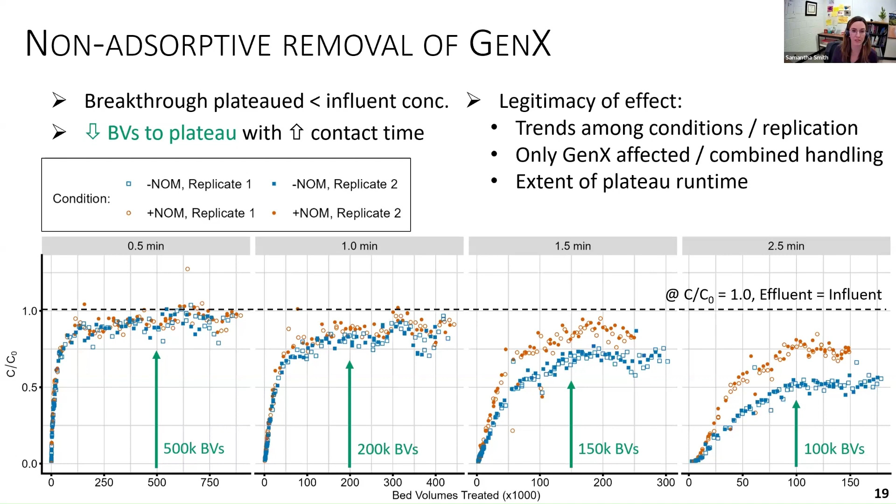Second, only GenX behaved this way, yet it was dosed, collected, and analyzed simultaneously along with the other 8 PFAS. Third, the plateau lasted a very long time with no observable increase in C over C naught. For example, even on the longest bed, which was that 2.5 minute EBCT, it ran for 75,000 bed volumes and additional breakthrough was not observed.

GenX, which is an ether, has an oxygen atom in its carbon chain, and this has been shown to be a weak point for chemical or biological degradation. However, in this study, we used much shorter contact times and lower concentrations than literature studies that had demonstrated this. So more investigation is needed to explain why this would have occurred in our systems.

So we did some preliminary non-targeted analysis to look for possible GenX degradation products in the effluent, but none have been observed so far, so it remains an area of future study. And interestingly, this GenX behavior hasn't been reported in previous pilot studies, likely because their runtimes were shorter than when this effect would have become observable.

And because of the effect of contact time, rapid small-scale column tests or RSSCTs would be even less likely to observe this effect. So getting back to the PFAS experiments as a whole, the ion exchange column model was applied to simulate column effluent concentrations and to evaluate model performance in comparison with those experiment results. And here's the list of model input parameters.

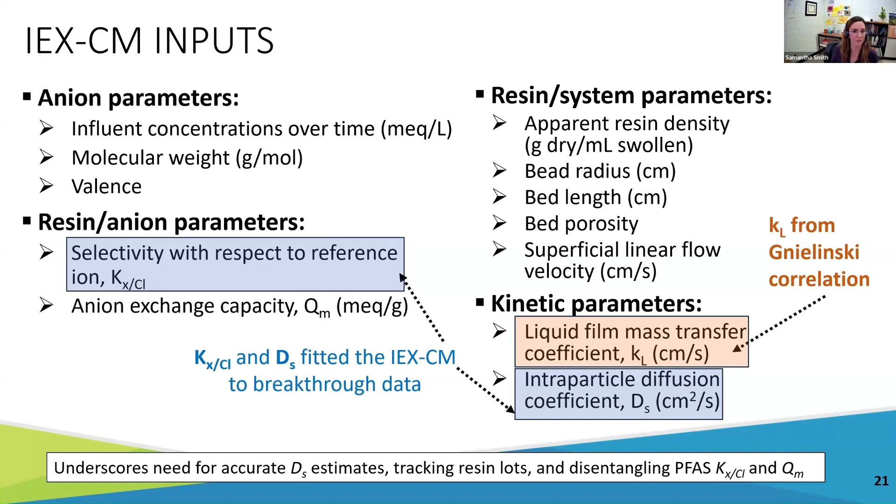So in order to have enough data to fit the selectivities and intraparticle diffusion coefficients, the PFAS needed to hit at least 50% breakthrough. And with this constraint, column model simulations were able to be performed for 6 of the PFAS. This included PFBA, PFHxA, and GenX at all of the contact times, and PFOA, PFNA, and PFBS for at least 1 contact time.

PFBA was overall well described in all conditions, and for this and subsequent plots, all the points are the pilot data and lines are from the model simulations.

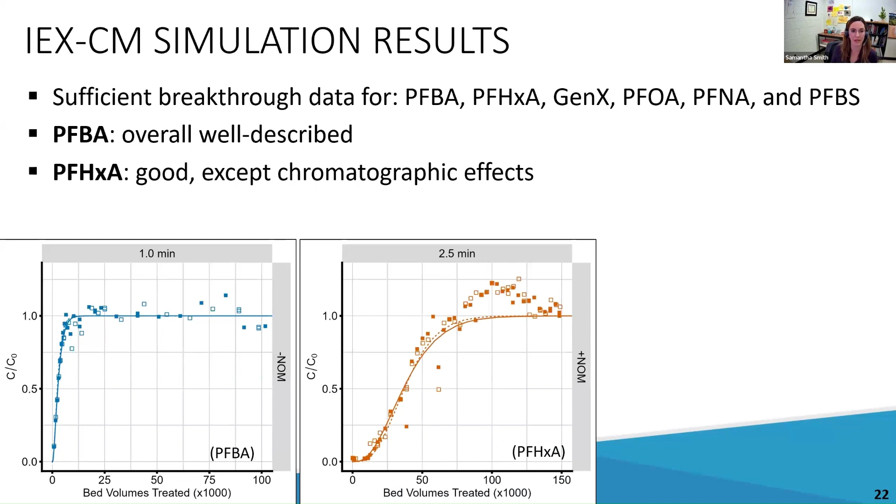PFHxA also showed good model fit with the exception of some chromatographic overshoot. Again, that's where the effluent concentration exceeds the influent concentration. This occurred on the longer beds, both with and without NOM, and couldn't be captured through various changes in our model inputs or competition among PFAS. So some underlying assumptions in the model should be reassessed. And of course, because of the non-adsorption removal of GenX previously discussed, the column model can't be expected to explain that GenX breakthrough.

Next, PFOA was well described by the model, except for some incipient breakthrough that was not observed experimentally. PFNA showed that the model correctly predicted the extent of breakthrough, but the shape of that curve was poorly described, including some incipient breakthrough here as well.

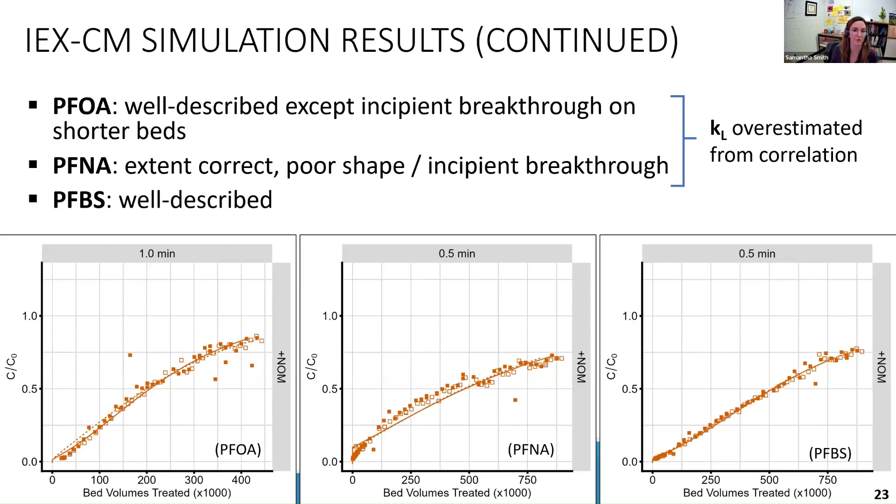So for both of these, they appear to have been affected by overestimated film transfer coefficients, or KL, from that correlation. So we're looking into some alternative correlations currently. Lastly, PFBS was well described by the model for the conditions with available data, and the evaluation of the model performance versus the pilot study data was very useful to better understand PFAS ion exchange behavior and to illuminate some of those areas for improvement in further model development.

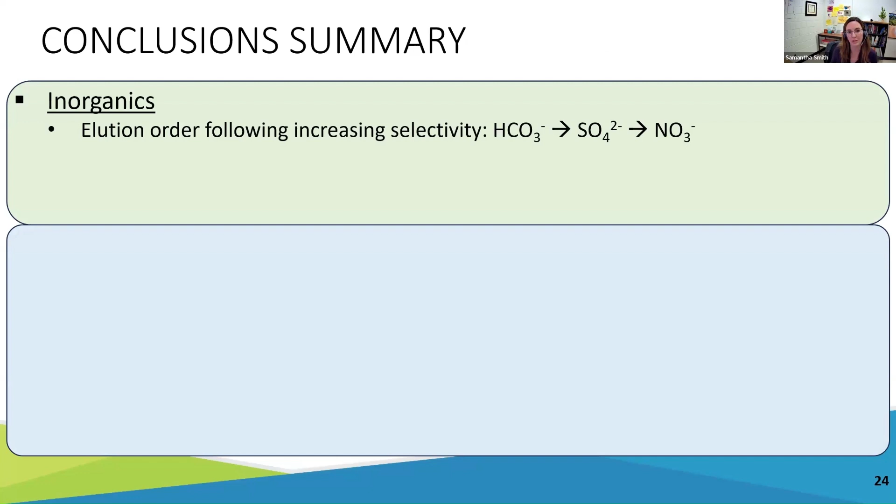So just to summarize some of our conclusions, from the inorganic study, we saw that the elution from columns occurred in the order of increasing selectivity of the inorganic anions, as one would expect.

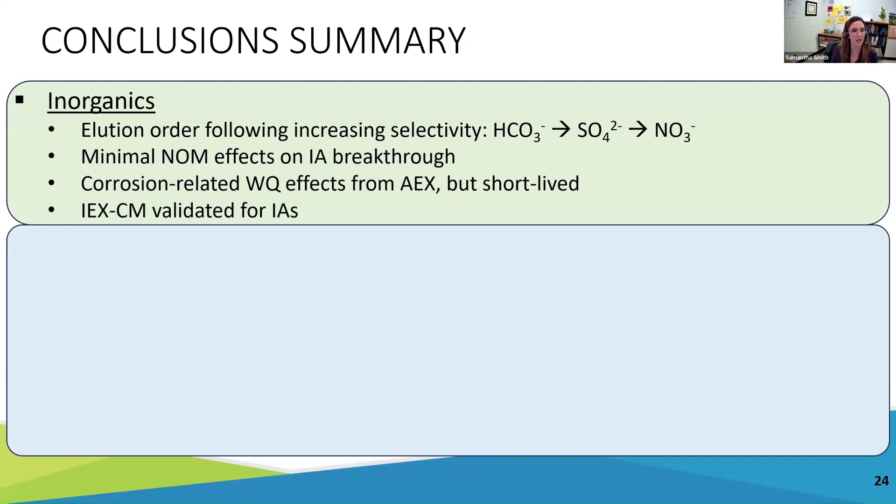The NOM had minimal effect on inorganic anion breakthrough, and while some water quality effects related to corrosion parameters were observed, these were short-lived. Lastly, the column model was validated for the inorganic anions.

From the PFAS study, PFAS breakthrough largely trended as expected based on chain length, functional group, and usually by their selectivities. NOM caused earlier breakthrough, with the effect varying among the PFAS, usually with later eluting PFAS having a greater NOM effect, and this was apparently due to physical fouling of the resin.

GenX breakthrough behaved anomalously, plateauing at less than its influent concentration, which points to transformation or degradation occurring within the resin columns. Tracking of resin lots is recommended based on some observed differences in resin parameters and treatment performance in this study, as well as in comparison with previous studies.

There's a need for better estimates of diffusion parameters, in particular, a direct estimation of DS and better correlations for KL. Lastly, for conditions with available data, the column model successfully simulated PFAS breakthrough with a few exceptions: the chromatographic overshoot on PFHxA, the incipient breakthrough on PFOA and PFNA related to that KL, and the non-adsorption removal of GenX.

Overall, the results of this research provide us with essential information pertaining to anion exchange treatment of PFAS in drinking water. To continue from here, some future recommendations would include continuing to investigate several model parameters.

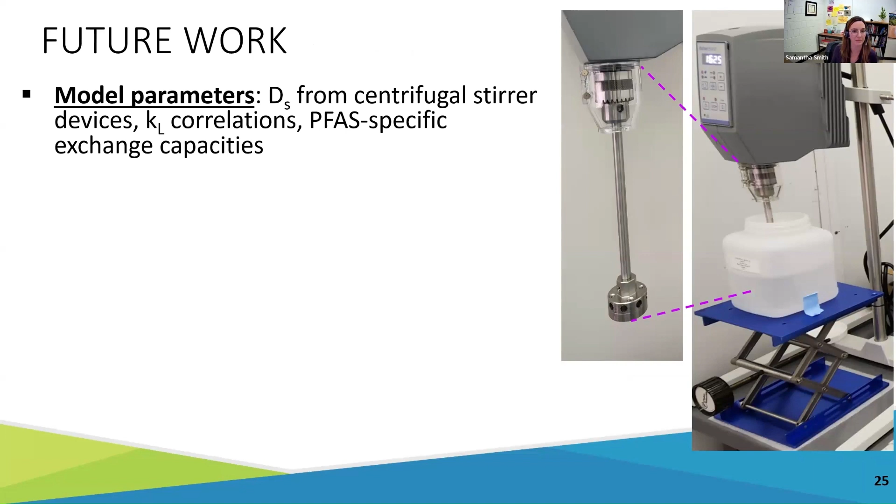Several efforts could help us better understand NOM impacts. We already have multiple studies using macroporous resins underway, including some pilot scale columns. Future experiments could also investigate preloaded resins, obtain equilibrium and kinetic parameters for the NOM itself, and the column model should be updated to account for these effects.

Additional PFAS breakthrough data would be helpful, especially for the later eluting PFAS. However, this requires long run times and a lot of resources. Rapid small-scale column tests, or RSSCTs, have been used for GAC for decades, but more fundamental work is needed for the anion exchange scaling equations, since they're expected to differ from those used for GAC.

Lastly, for the non-adsorptive removal of GenX, a few things that may help reveal a cause are continuing non-targeted analysis of the column effluents and the spent resins, and we could also get more data from running at longer EBCTs.

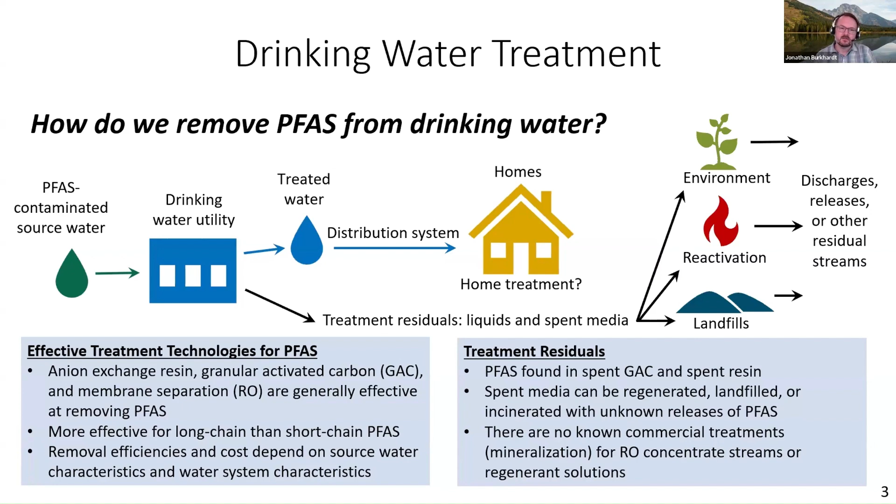The previous talks have really highlighted these technologies. I want to focus on the top two technologies, carbon and resins. They've been described in great detail by previous speakers, but they have breakthrough behaviors, so they can remove essentially 100% of the contaminants for a time. We'll touch on that.

Generally, all the technologies, including the high pressure membranes also discussed previously, can remove co-contaminants, although the types and specific co-contaminants may vary, and they can have other positive benefits to your treatment train that you can look into if you would like.

But there's also issues, and that's also been discussed, the idea of unintended consequences or the impact on other types of compliance with other regulations. Sam talked about the increase in chloride to sulfate mass ratio, which could potentially lead to corrosion. With resins, the topic of carbon potentially impacting arsenic for the initial flushed water was brought up as well.

For the purpose of this discussion, we have potential overshoot. Sam talked about that, chromatographic roll-off. Some of the short chain compounds can be difficult to treat, so understanding if that is a concern for your system, you can think about that, and that's where models can potentially help you.

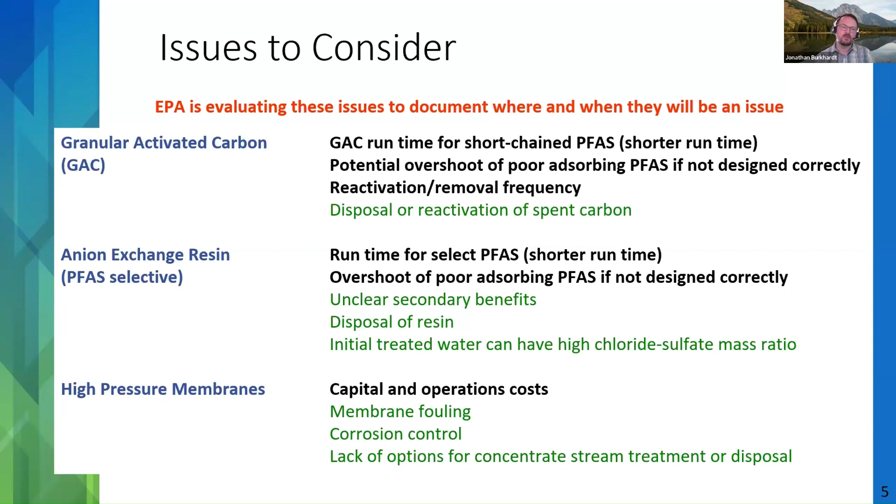That's where we get into the treatment performance models that will make up the remainder of the slides. The objective here, as Sam described, is to really predict how adsorptive medias perform for removing micropollutants, specifically PFAS. They can help interpret pilot or other testing results, as she highlighted.

One of the big aspects is that if you have pilot data or other kinds of data, you can then model different concentrations, flow rates, system sizes without having to recreate that pilot. I think Yasmina also mentioned this, so you can leverage these models to predict different conditions than the pilot without necessarily replicating those pilot conditions.

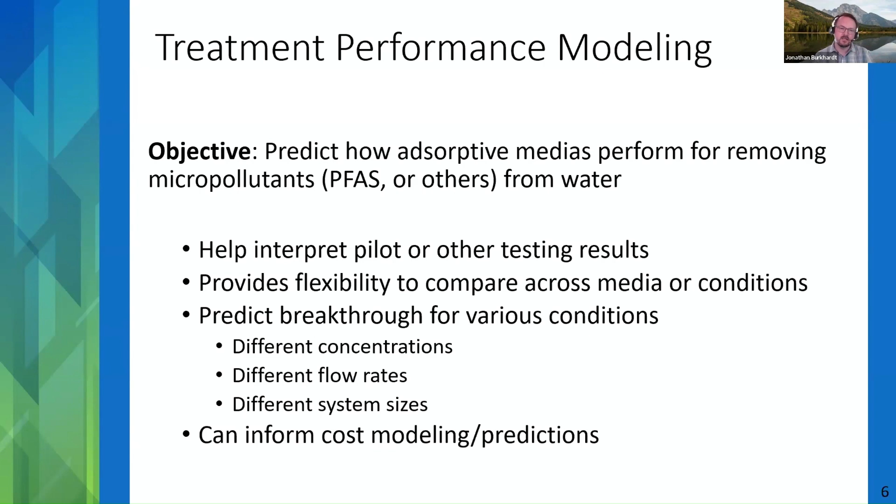The bottom bullet is really important. It can inform cost models and predictions, which is what a lot of people are obviously concerned with, and how to understand O&M costs and so on.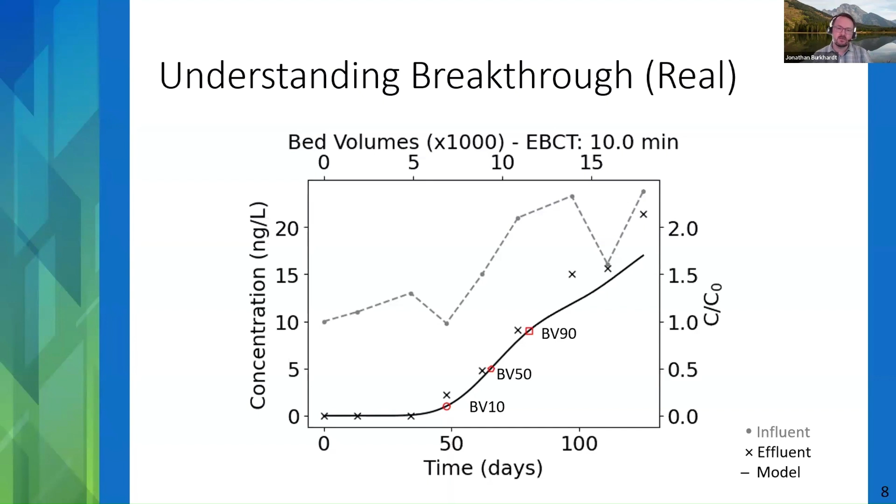So you're actually replacing PFAS or some other compound with chloride, which is the common initially loaded ion on the resins. You're basically selecting one versus the other. The higher that K value, the more selective, and therefore the higher capacity.

For the GAC, we have a multi-layer isotherm. It's a nonlinear isotherm, the Freundlich isotherm. Here again, it's just figuring out how many nanograms of PFAS per gram of adsorbent is going to be removed. That's really capturing how much sticks to the media.

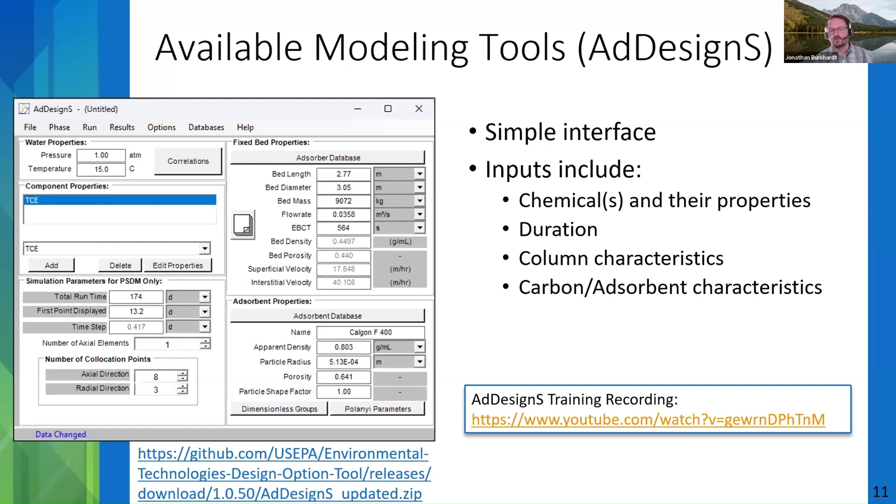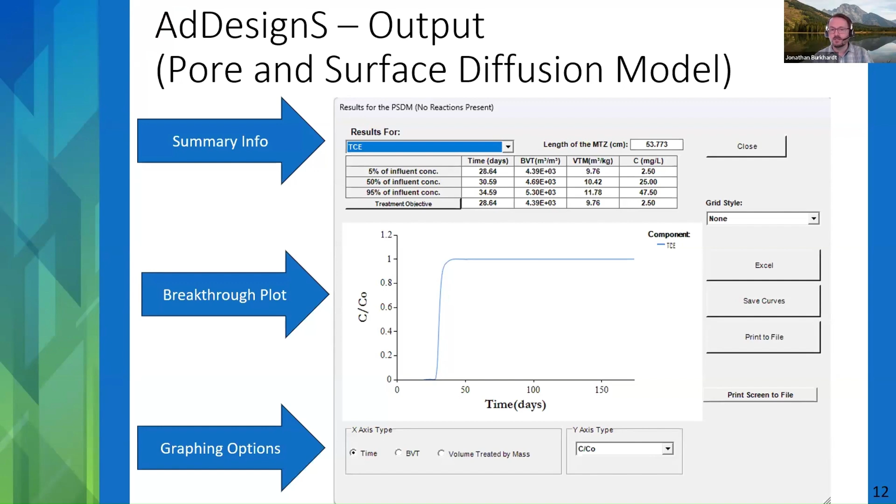So the output, if you run the model - this is a TCE or trichloroethylene model. It has a summary table, and it'll automatically provide information about 5%, 50%, and 95% breakthrough. You get the breakthrough curve we described, and some graphing options if you want to change the units on the axes. You can also export this to Excel if you want to plot that with your other data. You can use influent and effluent data in this tool as well to plot as part of this.

When we started this work that Sam described, we didn't really have an ion exchange model. So we came up with what we're calling Shiny IEX, which is part of the water treatment models repository. You can see that in the lower right, link to that. This does require RStudio, although we are looking for ways to potentially share this as a web-based tool.

It models the ion exchange process directly, as we described previously, modeling gel type resins using the homogeneous surface diffusion model and macroporous resins using the pore and surface diffusion model. The interface, chemical and properties required for input, the duration of the simulation, and the same kind of information that AdDesignS required. So if you're already familiar with AdDesignS, you're probably going to be very comfortable with this modeling tool as well.

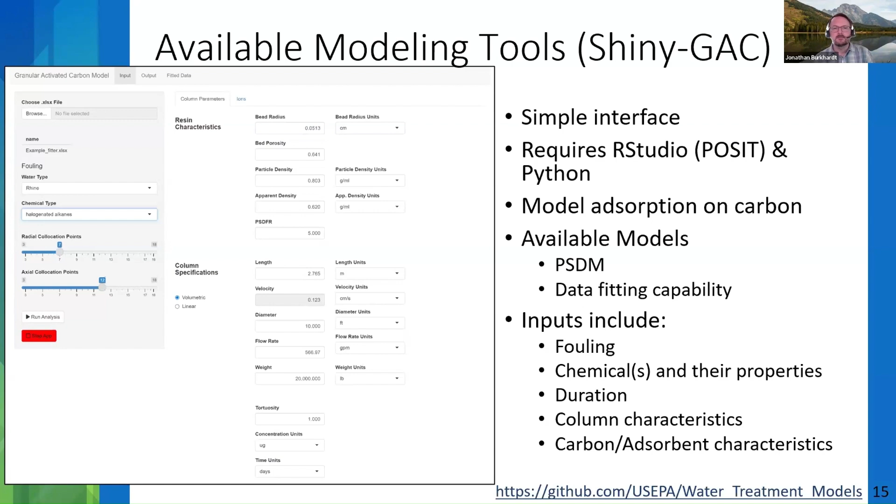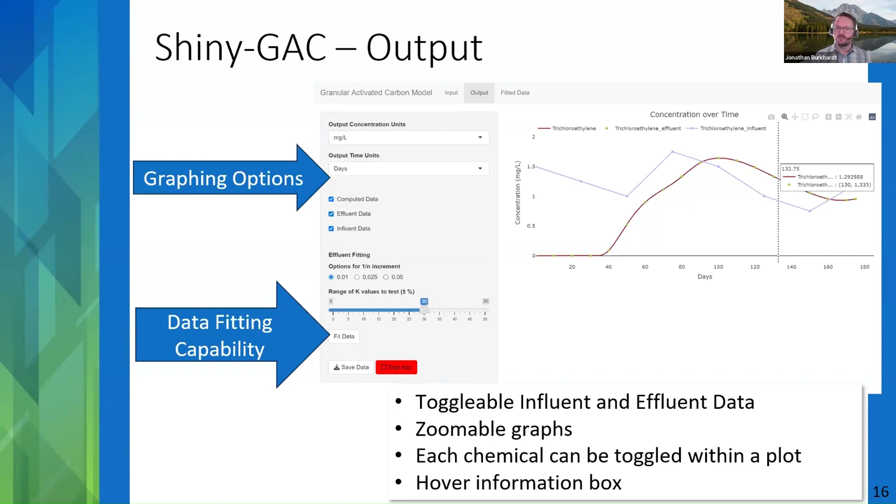We're only plotting one plot here, but if the reddish maroon line did not line up with the data - in this case it does - you could press the fit data button in the lower left of the tool, and it would automatically run through and give you an estimate for what that might be for the inputs. Again, similar, it's the exact same behavior - zoomable graphs and so forth are also available.

I'm going to skip this slide - that's just going to be the content for the next 5 or 6 slides. But the data fitting tool was demonstrated in a March 2022 paper.

This is basically looking at making the green line fit with the orange dotted line. You can see on the left there's a small X, which highlights where the best fit pair occurred, searching the entire space. We've made advances on that since.

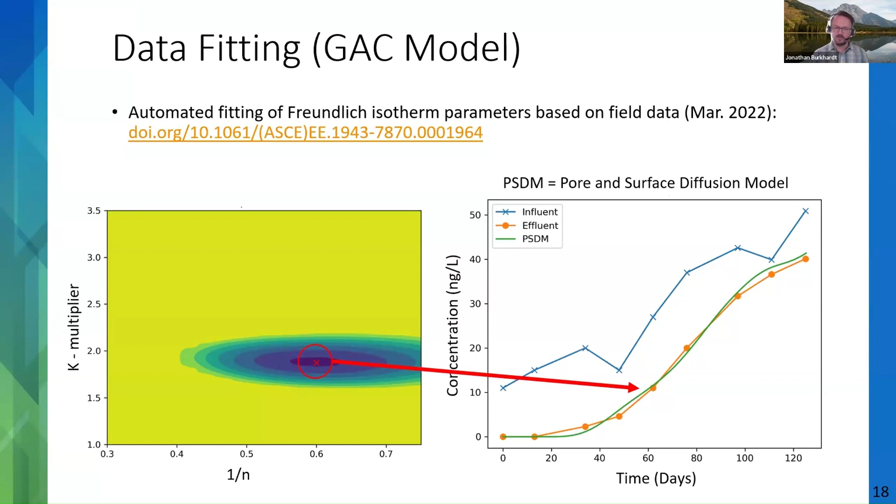If we take that data, you would get parameters - the Freundlich isotherm parameters - that made that fit, and you can use that to extrapolate these conditions. We actually took and modeled the case for a full-scale blended operation for the partner utility we worked with. They were concerned with not only their current treatment rate of 19 mgd, but also their future design rate of 44 mgd. They were also interested in looking at what happens if the concentration changes.

We also are looking at lead-lag modeling. It's a little bit more complicated - that's the first bullet - but the last point is that the modeling tools can do this automatically, and they're really designed, set up to try to improve the O&M prediction.

If we look at the figure, if we just looked at 2 beds in series, it would say 750 days would be the projected change-out. But it's really probably closer to 600 days when we consider the initial use while it's existing in the lag operation.

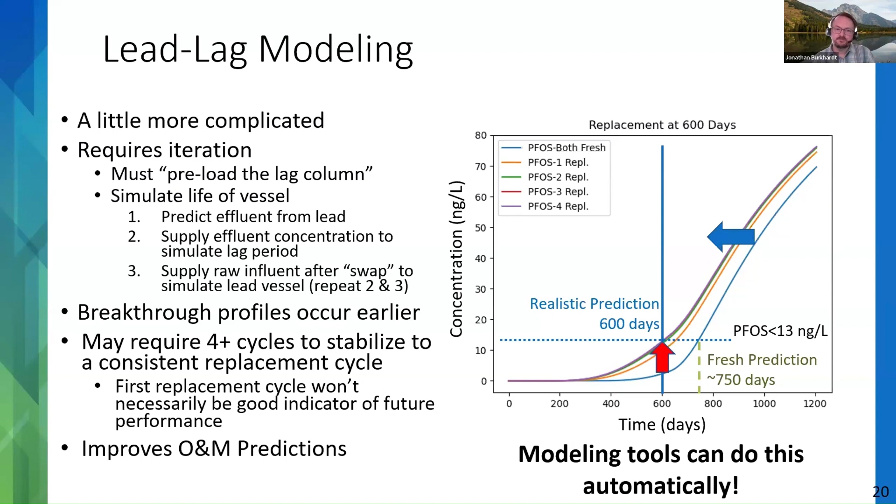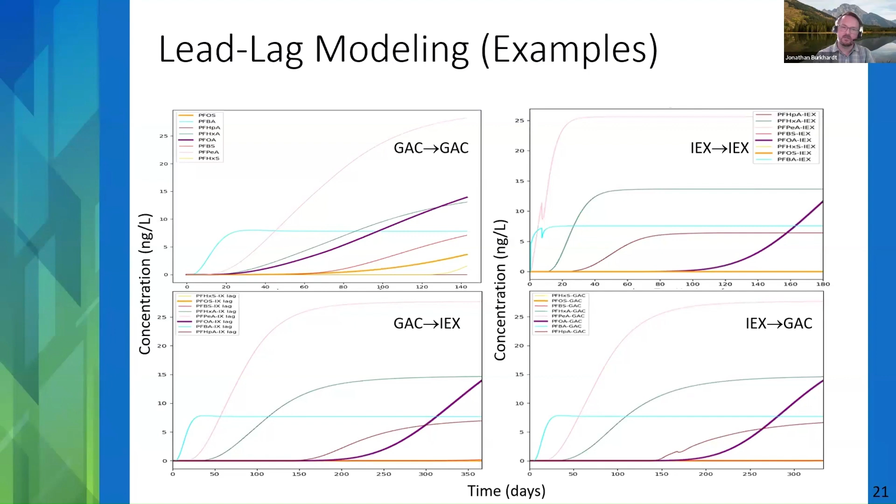We also looked at homogeneous and heterogeneous cases, which was part of the question, including thinking about short chain breakthrough. I won't go into that today, but we have looked at this somewhat, and we have the models able to talk to each other to understand how to do this modeling. If you're doing a lot of data modeling, you can also look at automating this.

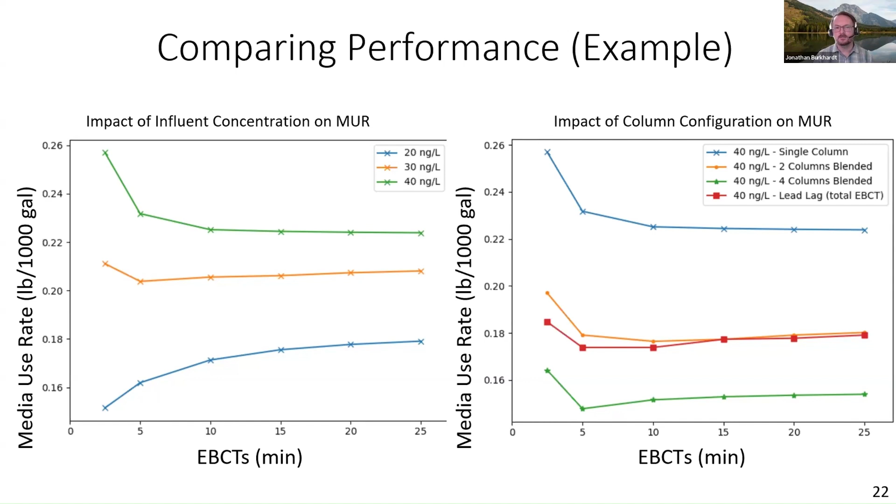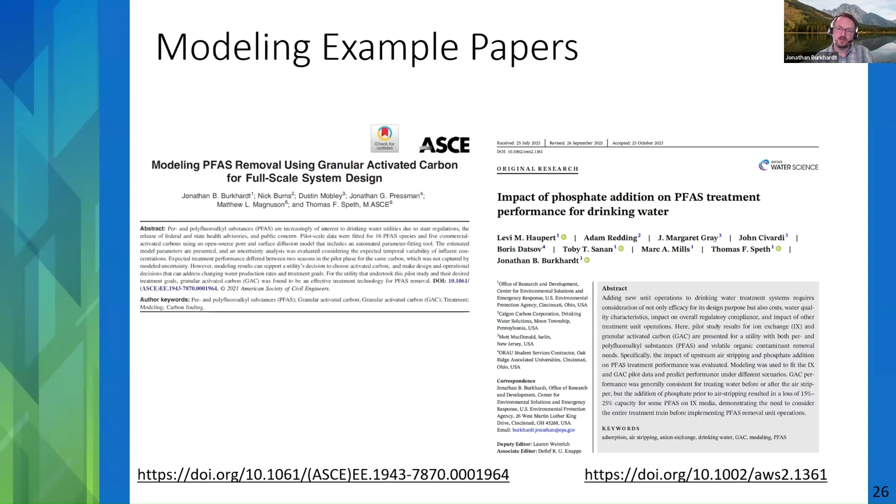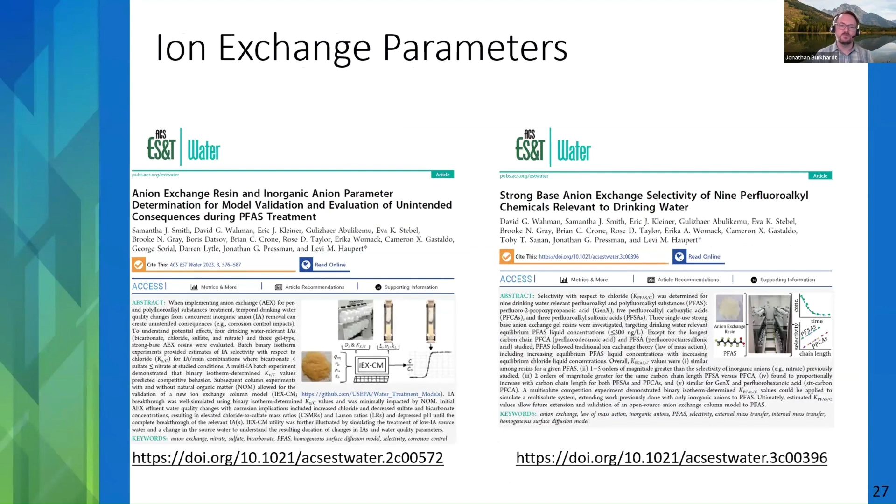The one on the right looks at GAC and ion exchange, but I think the interesting component there really is the impact of phosphate on PFAS treatment performance. These are two of Sam's papers, so I'll move on from that, but this is all just what she discussed in her previous talk.